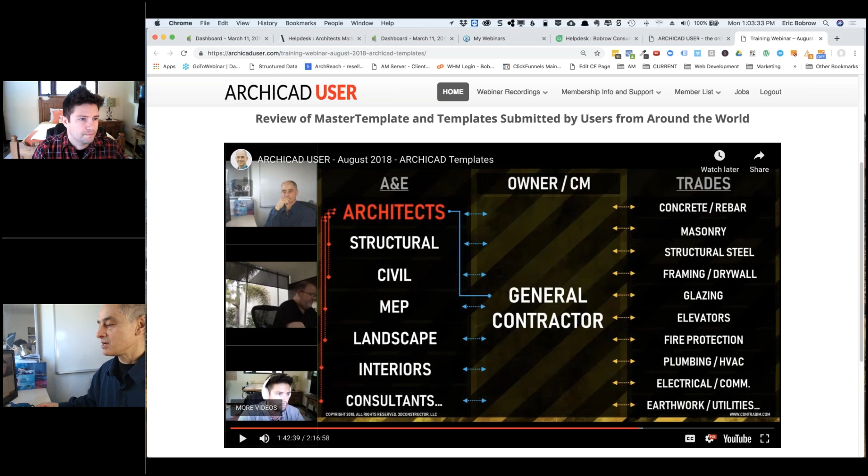Now, John was on the monthly webinar in August when I had a session that was focused on templates and sharing templates from different people. And John emailed me just shortly before that session saying, hey, you know, I have a template that people might be interested in. It's rather different. It's focused on construction management because that's what John specializes in. And so here you can see him in the bottom left corner of this screen. And actually, Roderick was on that as well. We looked at about 3 or 4 different people's templates as well as the master template. So anyway, I'm glad to have you back on, John. I'm going to switch over to have you show your screen and you can introduce your work.

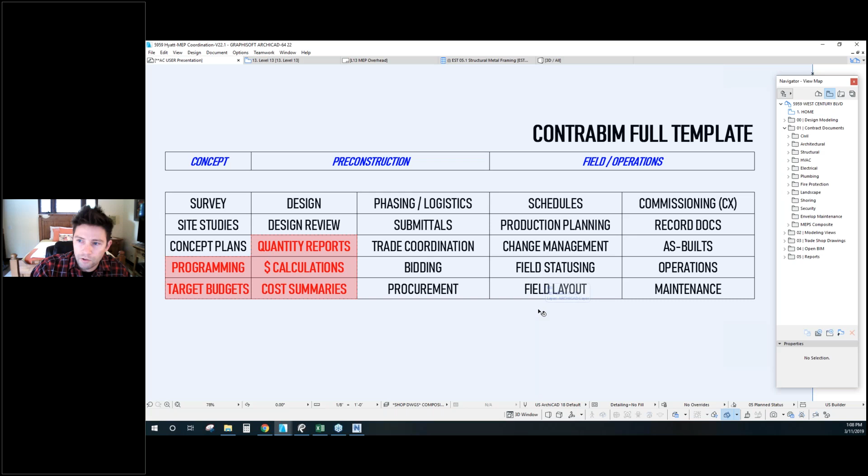But before we get into the cost estimating component, I thought it'd be good just to give a quick background on the overall template and show you the file that we're in right now, a file that I'm using primarily for construction coordination, to point out some of those other features and how I like to utilize ArchiCAD.

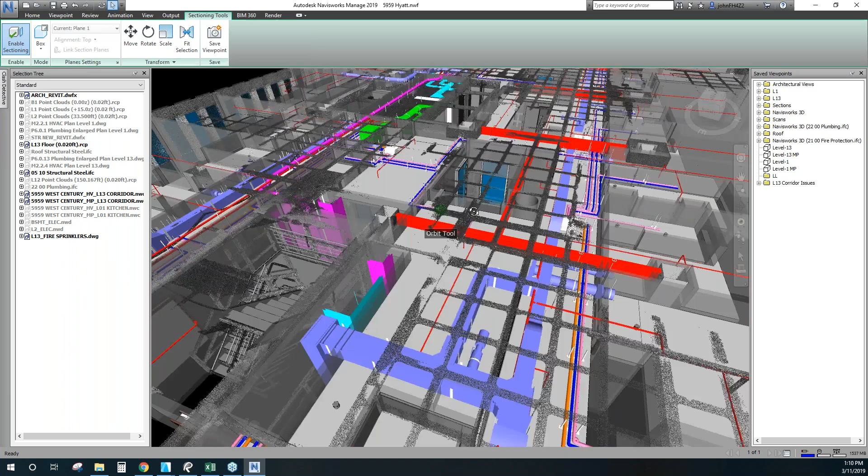And so really I like using ArchiCAD as a way of being able to organize all of my different, in this case, contract documents, as well as shop drawings that we're getting from the subs. So that's what I wanted to point out real quickly in this demonstration, just how we can organize this to bring all these different formats together in a way that you can really review it, produce different composite drawings, and really help aid the construction coordination process.

So a few things I just want to point out here in the view map: this is the full template that I provide, but this design modeling is set up for if you were to actually be developing design in this type of workflow. In this case, we're not using that, so we won't really even talk about that.

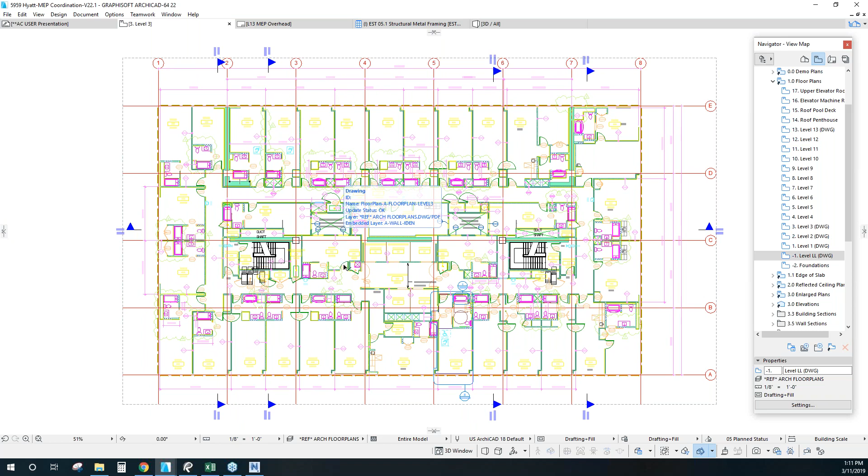But where things start coming together is underneath the contract documents tab here, which is where for each different design discipline, I'm able to essentially create different views where all these drawings, whether it's in a PDF format or a DWG format, can be linked into ArchiCAD. Now, this is, I'm sure, a workflow that a lot of people use as standard practice for linking in different consultants' drawings. But for construction management, this becomes really powerful when you can start taking your backgrounds, in this case, looking at an architectural background.

Say we'll go to that level, the 13th floor. And then we can start overlaying these different drawings against all of our other MEP design documents. So for each different discipline, I can just open up a few of these views real quickly. We can see ductwork here as well as mechanical pipe. For plumbing, you can go to that view and see the plumbing lines up there on the 13th floor.

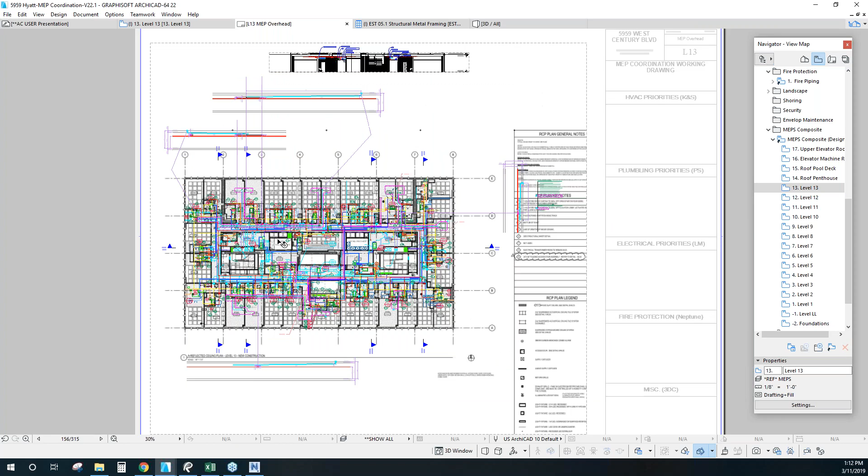Fire protection, there wasn't really a design document for fire protection, but we can start producing these composite drawings that are really useful for coordinating complete scopes of work in a given location. So what we're looking at here is an RCP with all the MEPs overlaid on top of it for what we have currently. And this makes it really easy to produce these different composite drawings that you can then publish out with layers, so you can turn on and off the different layers for different systems and use this as a nice clean document for communicating with the team.

So being able to organize contract documents is one big part of it. The other side of it is the shop drawings. So for example, being able to look at structural steel shop drawings. In this case, these are those new drag beams that we were adding to the space. Being able to bring together progress HVAC models. This is actually a single object that's brought into here, but this is a 3D DWG that I opened as an object to bring together.

And then of course, for the trades that I'm helping model, such as fire protection, we can open up the fire protection here and see that particular scope. And just like we can do with the design documents, you can also overlay everything on top of each other and use this as a way of really bringing all the trades together, your different design backgrounds, and really get additional views out of the model.

So one thing that's pretty cool here, I was worried I was going to do this and not be able to do a marquee. Let me see here. Oh, shoot. Eric, how do I get my marquee up here when I hid all of my design tools? I knew I was going to run into this. Let's just go, sorry, toolbox.

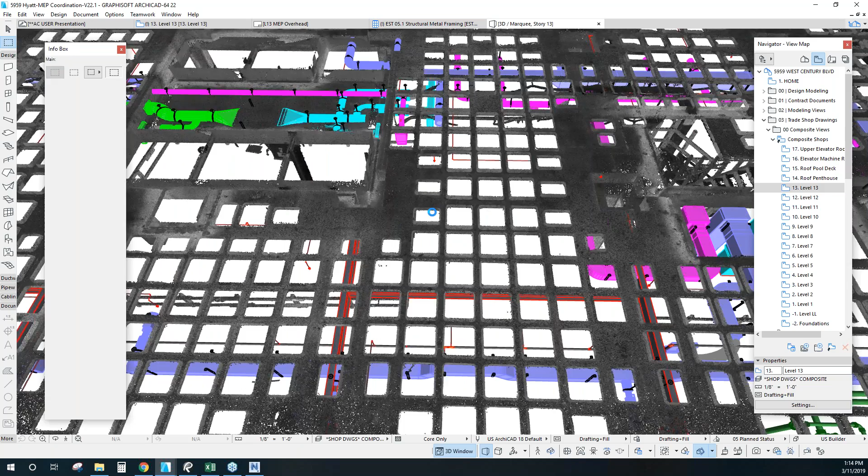Here we go. I just want to grab a chunk of this model. Maybe we'll grab right through here. Show this in 3D just so you can get an idea of what we're looking at. And so again, here's a combination of drag beams that I added. Fire protection is all the red here, as well as that 3D DWG that we had brought in as a coordination model. So one thing I can do here is turn on a point cloud that you saw a little preview of there.

And again, this is another way of being able to bring everything together into a nice working view to really see what's going on, and see that, okay, I've got issues here when modeling this in as the as-built or the shop drawing showed for fire protection. We're going to be hitting some drop heads or capitals here. So anyway, I just wanted to give a quick preview of how the overall bigger template can operate.

So hopefully that gives you a quick introduction into how the big picture is set up, really looking at design review, submittals, trade coordination, design, of course. And this is the area that I was just talking about. And this can flow all the way through into the field, and then ultimately, at the end of the day, having as-built and record documents as a way to capture all the design progression over time.

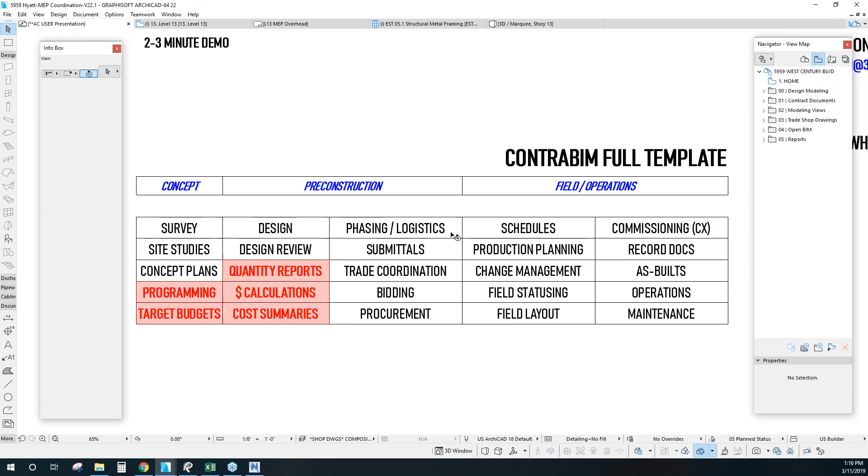Hey, John? Yeah. So there are a couple of questions that I think would be good to at least briefly address before you move on. Sure. From Tom Markunis, why use ArchiCAD for this workflow? Aren't there dedicated applications out there for this? And a somewhat related question from Luis Barrios: how much has to be modeled from the consultants providing only 2D work?

So I guess if the consultants are only giving you 2D, you have to model certain things to get obviously the 3D views and for quantities and things like that. So just a little bit of clarification on the workflow with consultants and the idea of using ArchiCAD as the central tool in this case.

Sure. Again, the purpose here for me on this particular project is just trying to coordinate these spaces as quickly as possible. Because the only thing that was modeled in 3D from the design team was essentially the architecture, which is what we saw here real quick with this Navis model. All the MEP consultants were doing everything in 2D, but the subcontractors in some cases are also doing some of that modeling, like HVAC, for example. How I showed that HVAC model that we got.

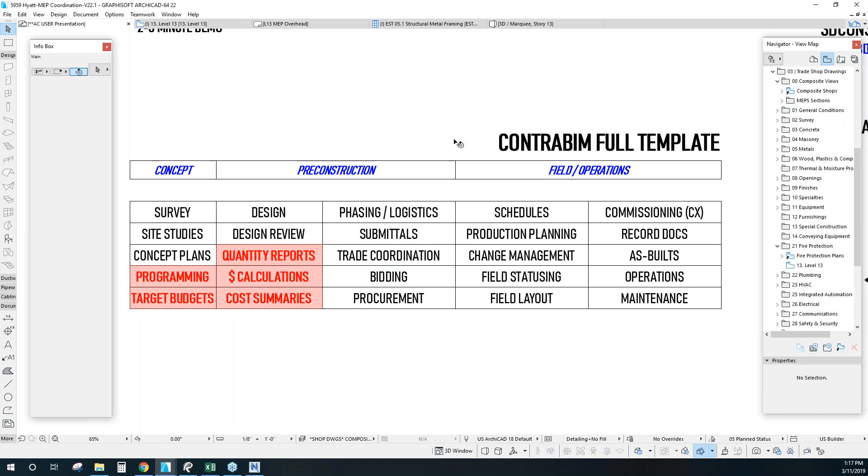Obviously I'm not going to be modeling something that a subcontractor is going to be modeling, but I am going to be doing select modeling, like I showed with the structural steel, the new drag beams that we added, as well as fire protection, things that we needed to coordinate the space in some really tight areas that weren't going to be provided by any other team member.

And since I'm taking lead on coordination on this job, it's kind of my responsibility to fill some of those gaps to make sure that in some of these tight areas, we can really make things fit and get underneath the tight spots. Like, for example, getting underneath these drag beams. I can see, obviously, in this case, the modeling done by the subcontractor is not going to work. And so if I hadn't modeled this in, then maybe we wouldn't have picked up on that.

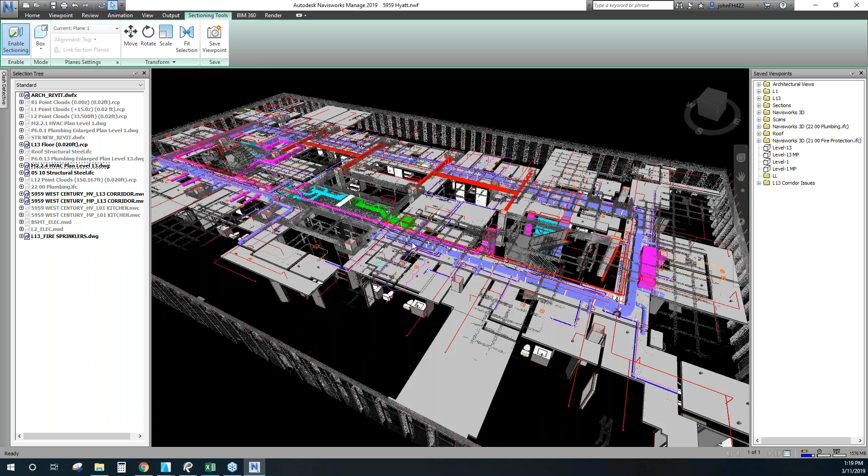So I think the first question was why use ArchiCAD versus other dedicated programs for this? Well, I'm using ArchiCAD certainly as a tool to provide additional support to the effort going on in Navisworks, which is where we're bringing all available 3D content together. But Navisworks is somewhat limited in terms of how you can view 2D content. Yes, you can turn on and view in 3D. Let me turn on HVAC here just for example. We can view this in Navisworks, but it's really not very useful to look at it in this type of format. It's better to have the 3D models there.

So again, I'm using ArchiCAD as a way to bring all that different content together in all different formats. In this case, contract documents as backgrounds, shop drawing models, additional models that I'm generating, and bring it all together, and really there isn't another program that can do all of that stuff in one package like ArchiCAD can. Not as well, at least in my opinion. So did I answer those questions, Eric? I think well enough for now. Obviously, one can go deeper and deeper.

So move on to, I guess, the core of what we wanted to look at today, which is doing the 5D cost and quantities. Sure. So when I look at estimating in ArchiCAD, there's a few crucial parts that I've developed that really make up the core functionality of the cost estimating workflow. For me, the big part of it is cost properties. Using ArchiCAD properties is really the main tool for managing cost data, as well as a bunch of other variables that go into the estimating workflow.

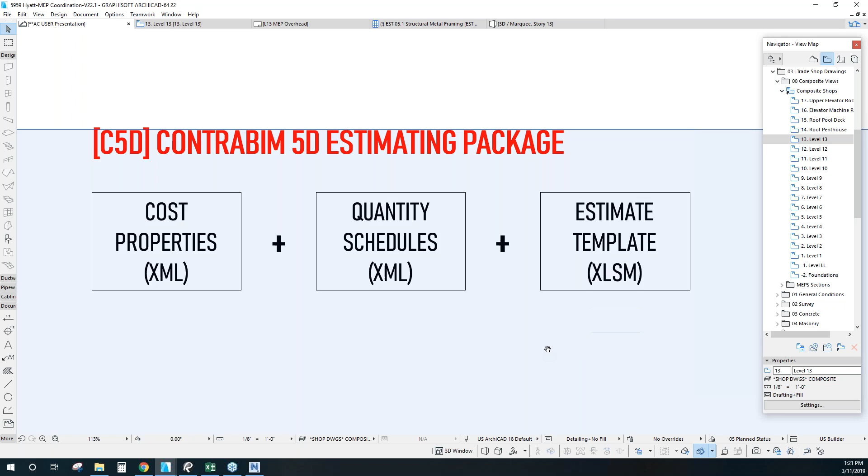So to dive into this a little bit deeper, how this can be applied, for me it all starts with properties. Having properties available such as your unit cost, specifying units, maybe different pricing packages, different factors, and really having all those underlying data and parameters available to drive the estimating workflow. So for me, properties are really essential to my workflow. There's other ways of generating some of this info, such as through IFC or through some of the native parameters available in the design tools themselves. But I found that properties really enable you to move data around quicker. You can import and export it to Excel and do that round trip update.

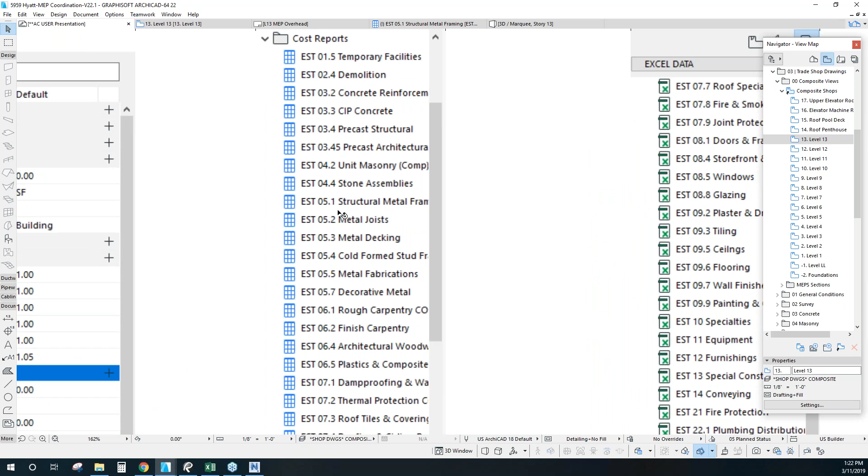And it has just become, for me, a really useful method for storing and managing all that cost data. So really the next step after you have that data available is creating cost reports. So you can see here, if I zoom in a little bit, we can see our concretes, our masonries, our steels, our wood, thermal protection. I essentially like to mirror all the different bid packages and the CSI categories into the reports within ArchiCAD. So that's what we'll show here in a little bit.

And as you do this, that's where you assign your different codes, your cost data, and you use these reports for what I call conditioning the data. So, going through and fine tuning what information's in there and your unit pricing and how you're pricing it. So once you've dialed in your reports, then you can set up your publisher and ultimately just refresh your publisher with a link into Excel. So that's the workflow and the big picture: properties, reports, and publishing with Excel.

So now we'll transfer over and we'll do maybe a, Eric, are we still good for maybe a 15-20 minute demonstration of this workflow? Absolutely. Okay, on time for now.

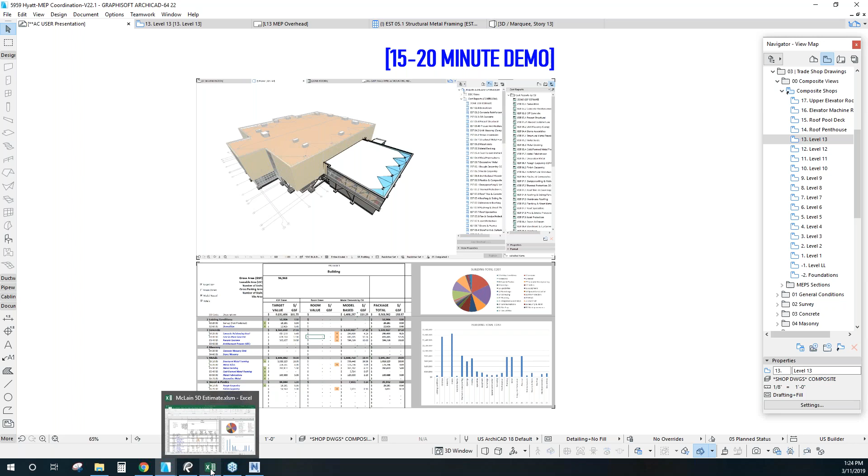Okay, so we'll be taking a look at this project. We'll go through all these different cost reports, not all of them, but maybe just a few select ones. And then we'll look at how it is being tied into ArchiCAD. So you might have seen some of the videos that I've done in the past, and I'm thinking for this presentation, instead of starting in ArchiCAD and then going to Excel, it might be interesting and maybe even easier to understand if we start with the end in mind and then work backwards into the model so we can see where that cost data is coming from. So I think that might be a better way of doing this.

So I'm going to pull up, we're going to start with the Excel estimate template that we're looking at here. So what we're looking at in this view is the CSI summary Excel estimate template. And what I want to point out here that's pretty important is on the left side, these two columns right here, these are my standard line items that I like to use on every single project, regardless of the project type and the contents of those projects. So having a really standardized summary sheet just makes everything easier to work backwards, so that you can fill the different scopes in a manner that's always going to be reported into this summary view.

So as I scroll all the way down here, we can see we go down to division 33. CSI does have more divisions than this, but this is really the bottom line of what I call hard costs, or costs related to the final product themselves. And then below the hard costs is where we can start adding in our general requirements, general conditions, as well as all the below the line markups that we might want to add in, so that we ultimately end up with a grand total. And we actually have a few different options here for producing different grand totals.

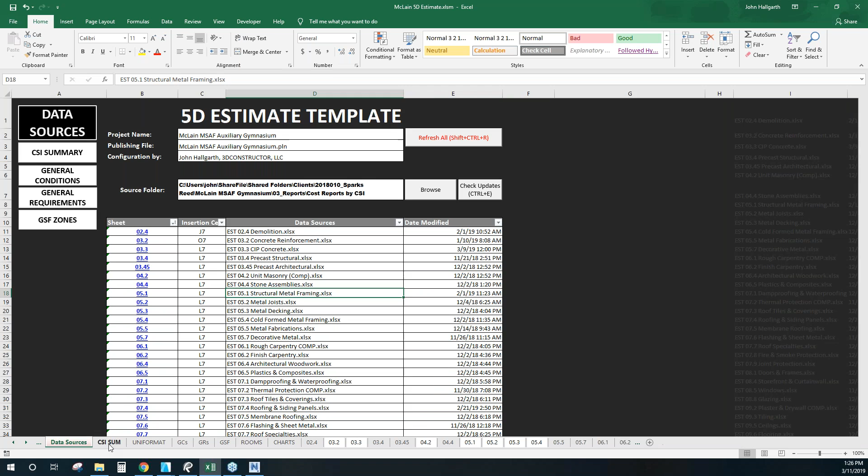Going back to the cost reports, anything over here on this side is all hyperlinked. So if I click on one of these, it's going to take me to a cost report specific for, in this case, cast in place concrete. I can refresh this data. And what it's highlighting here is the data source coming in from ArchiCAD. So if I delete this, you'll see that everything on the left side here is all formulas being pulled directly from the data source on the right. So as I refresh, everything updates and populates.

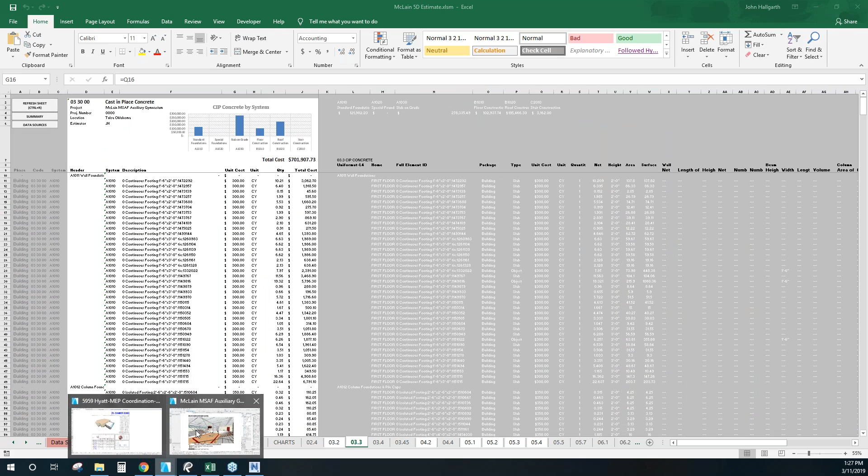And so when I publish out from ArchiCAD, all I have to do is just refresh this sheet and then all the numbers are going to be updated. So again, kind of working backwards into this, I think now, with that kind of setup, maybe it's time we can jump over to our project and then we'll kind of work things the other direction from here.

Just a quick note, my client in this case was Sparks Reed Architecture. They're based in Oklahoma. They approached me with a project that they had previously modeled and completed. One of their designers actually attended one of my workshops, and after the workshop asked me to essentially take their existing project file and build out the cost estimating workflow into it, so that they could reuse this exact file on their next project of pretty much the exact same project type.

So building another basketball arena essentially for, I think, the same school district is what they were wanting to use this model for. Their purpose for having this cost estimating workflow built in was so they could run reports and quickly get all the quantities, and based off the pricing of this project that they were already in the middle of building, where they had some decent unit price numbers, be able to apply similar pricing to the next project.

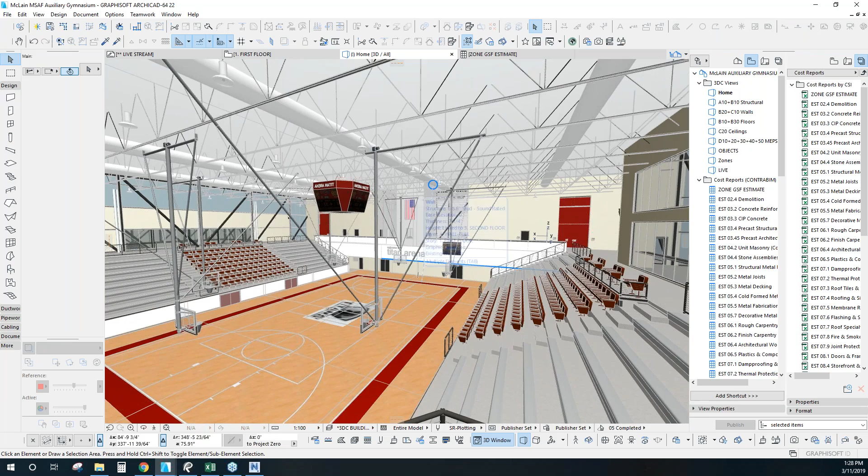So to walk through the steps of how I approach this, it all started with looking at the properties. Anything here with a CB behind it stands for the 5D portion of my template, or the Contrabim 5D parameters. One of the important parts when I look at assigning information to a model is how you break that up into different CSI codes. Just by using an option set here, we can assign these codes, and as soon as I assign them to individual model elements, we're already starting to get in line with the summary estimate sheet we pointed out a few minutes ago.

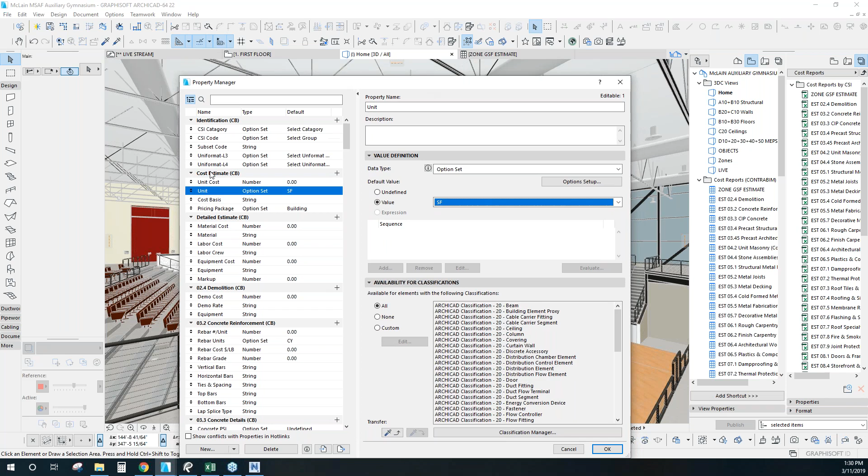So depending on what I assign it to here, that's going to give us a really good chance of getting those elements to land on the appropriate cost reports, so that they end up in the right buckets when we look at things in the summary format. I like using a combination of CSI codes as well as Uniformat codes, which can be really useful for organizing building systems. But this is also where we store our cost estimate data, so unit costs, defining what units of measurement we're assigning to different model elements, and so on. So there's a lot of different cost properties here.

I'm just going to roll up a few of these, but really that's the first step: going through and adding in these properties and making sure they're assigned to the appropriate classifications. Once we've done that, we can start looking at the individual cost reports. So the process is you import the properties, and then you can import all these different cost reports. Let's pull up that cast-in-place concrete, and we can quickly show how we can refresh from our model right back into Excel.

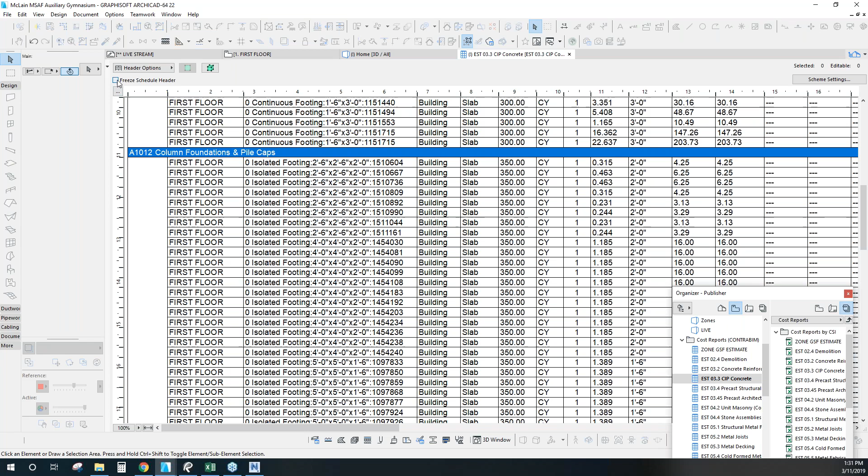To get a little more space, I'm going to roll that one over and pull this down so we can see it off to the side. In this report, we have a header based off Uniformat level 4, so we can see wall foundations, column foundations as we scroll down. Let me freeze that top header. As we keep going down, we have a few other items. Some of these probably need to be renamed with a more accurate element ID. But if we grab just these wall foundations, by highlighting the header and clicking on it to select in 3D, it'll select all of those foundations for us.

We can isolate those. And if we want to do an update on the cost, I would do a Control-Shift-T, which goes into the edit of the selection set, allowing me to modify both objects and slabs. That's why I'm doing it this way versus going through the info box. Say instead of 300, we want to go to $275 a cubic yard for these wall foundations. So we do the update there. Then to go round trip, it's just going back to the publisher we've set up, which is essentially these same cost reports located in the publisher under a cost reports folder. Go here, publish.

Now that we've updated that to 275, as soon as we come back here to our cost report, all we have to do is just refresh, and we can see all those wall foundations updated our cost. So that's what I really like about this workflow, is it's really quick to work in the model and go back and forth to refresh things.

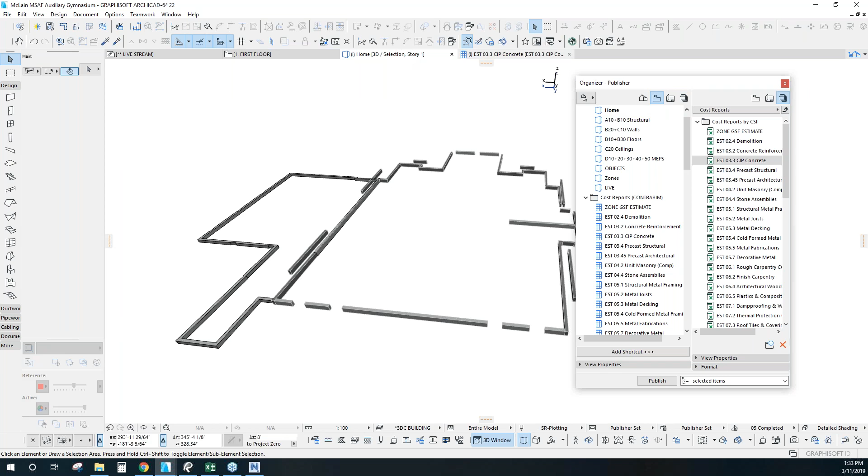And it gives you a lot of flexibility, breaking down your cost reports into these individual trade packages is how I like looking at them. Because depending on what trade you're looking at, you're going to have very different data associated with those reports.

So let's take, for example, the structural metal framing, which is, again, a totally different type of report. We have different values here, such as the object type in this case. So we're actually pulling into the ArchiCAD attributes to pull some of this out. We're basing this, instead of off cubic yards, off tons.

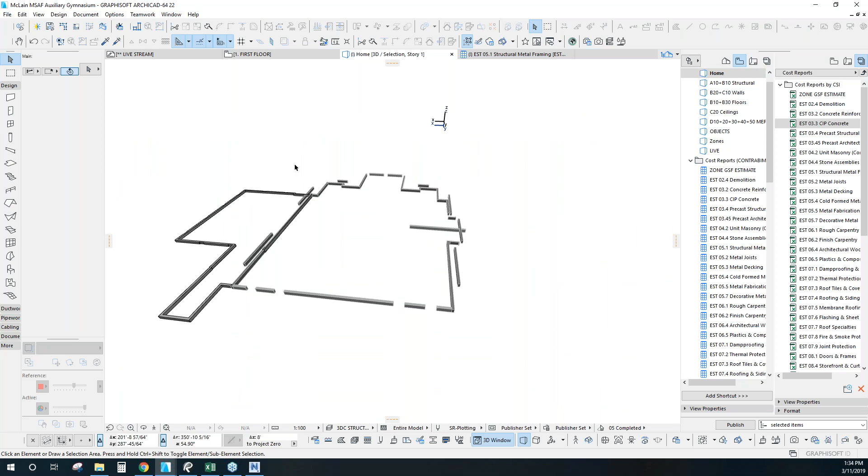In this case, we're actually not pulling up the W shape for structural, because what's interesting about this is it's actually content. Oop, I need to unfilter that. This is actually content coming through from an IFC import of a Revit model. So what's cool about this is we can still do these estimates based off anything that's native in ArchiCAD. It's always easier in ArchiCAD, but we can also do this based off external design content as well.

And so again, in this case, structural columns we have there, structural braces. I could grab all my braces, go in, and maybe I want to update the cost here. Maybe these should be a little higher, maybe 3,500 instead of 3,250. Update those, go back here. It's a lot of elements, so the more elements you have, the longer it'll take, but we can quickly publish that one because it's already loaded.

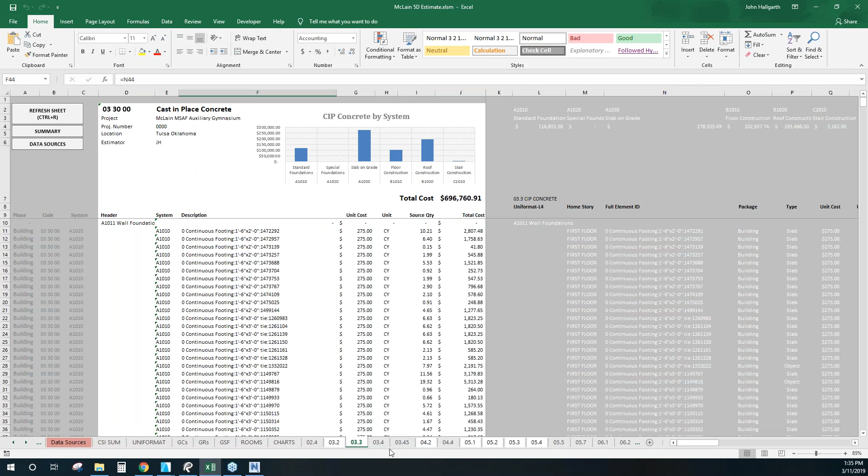Go back to our estimate, go down, let's find our structural braces. So hit refresh, and there we go. We're now at 3,500. So that's kind of the workflow in a nutshell. Each of these has different criteria. Some can be based just off the CSI codes that we assign, which I've found to be the very cleanest, simplest way.

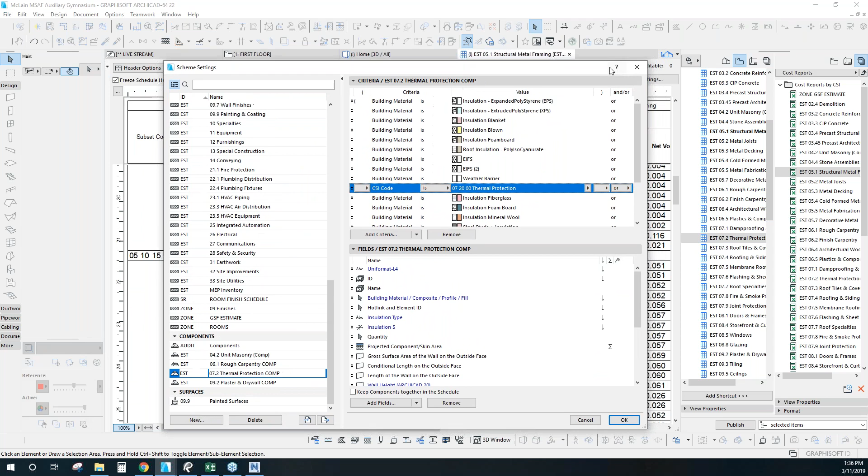But some other reports might have different criteria that we want to set up, such as using building materials, where perhaps we want to pull out of a composite profile or a complex profile. In this case, say insulation pulled out of a wall profile. So that would be another way of going in, as well as combining that with, say, a CSI code to extract data into these very specific cost reports. So yeah, that's kind of the workflow.

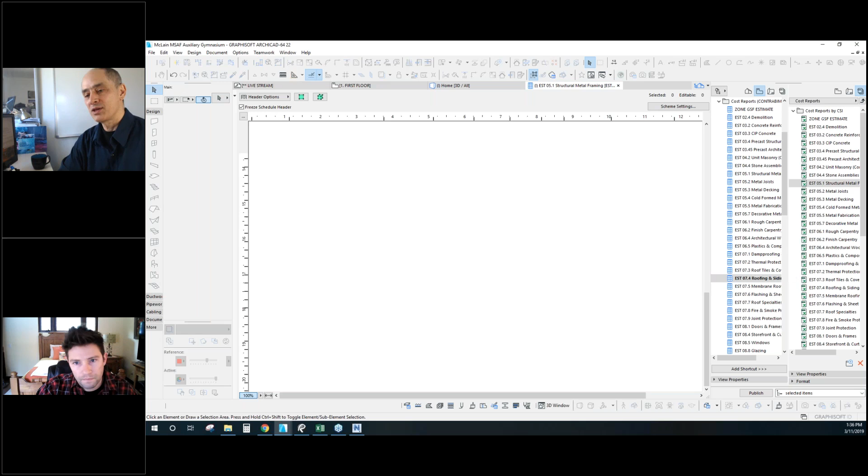So I see some questions from Tom Markunis, who I know has been doing some work with, I forget, he might mention, a very prominent architecture firm. He's been in Cairo, I think, working on some projects there, but a famous American designer.

But he's asking about the size of the model and whether you need lots of processing power to do this. And of course, you showed one 15-story building or whatever it was, and you showed this gymnasium. So talk about the size, relative processing power you need to do data like this, and how it relates to 3D, because my impression is that the data side is actually a little easier for ArchiCAD than cutting detailed sections of a very complex model.

And then the other thing is, Tracy Stone asks, do you have to manually assign the properties to each element, and how long does that take? So those are a couple of questions you can weave together. Yeah, so in terms of the size of the model, I was looking through some files here to see if I could find the original model size.

Currently, this file that we're looking at for this gymnasium is just under 300 megabytes, so I wouldn't say that it's a massive model. I know some files can get much larger than that, but I don't think it was much smaller than that. It may be like 10, 15 megabytes, but I don't think it was drastically smaller than that. So the data didn't add a whole lot of size, the costing data.

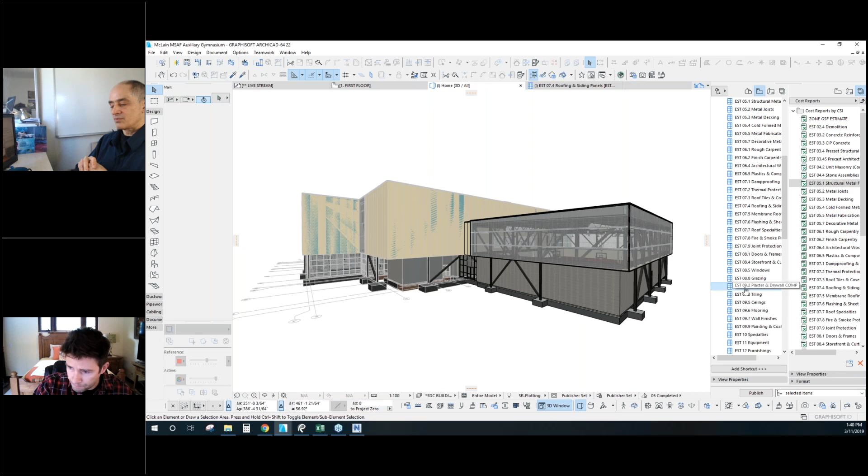Yeah, so you do have to manually assign stuff. Some of the reports that you wouldn't have to would be the ones that are actually pulling out the materials. So all you would have to do is just align the building material to whatever the local attributes are, and then this would automatically start running reports just by going in and searching for it. So basically it will just report how much gypsum board or insulation or whatever. Yeah. That type of report is not referencing the codes.

Most of these reports are going to be referencing the codes that I've assigned. So in that case, it is a manual process of going through and assigning the correct codes and the cost data to those. You have to assign cost data regardless. That's a manual process applying that to these different categories. But for me, it's a process of reviewing the content of the model, kind of performing QA/QC to make sure that it's modeled accurately, so I'm going to get the anticipated quantities, as part of doing quality control on the model.

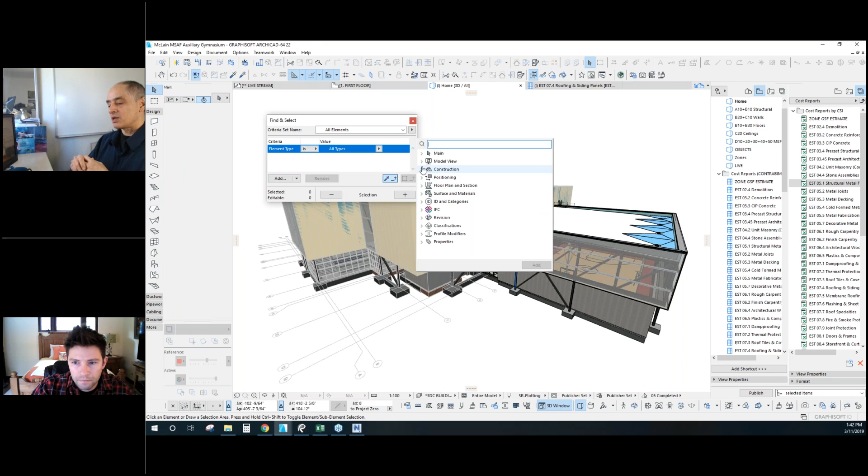Okay. So you've developed some very efficient ways to do find and select and be able to make sure that everything is assigned to something and that you can see all the elements that are actually grouped together. I know you can isolate all the elements that are under a particular category and say, show it to me in 3D, and then you can see, oh yeah, that looks good, or wait a second, there's something in here that shouldn't be. So I know that you've developed efficient ways to do it.

Question, Lewis asked, what level of detail or LOD is the gym project? I'd probably say this is 300, 350 maybe. Okay, and for those of you who don't understand that reference term as an actual formal term, as you go up through the levels of detail, you get more and more information visually as well as data. 100 is very conceptual. 200, you're getting some more geometry in there. 300, you're starting to get working drawings, I believe, and 350. And then 400 is where you actually could do a full-size cutout of things if you wanted.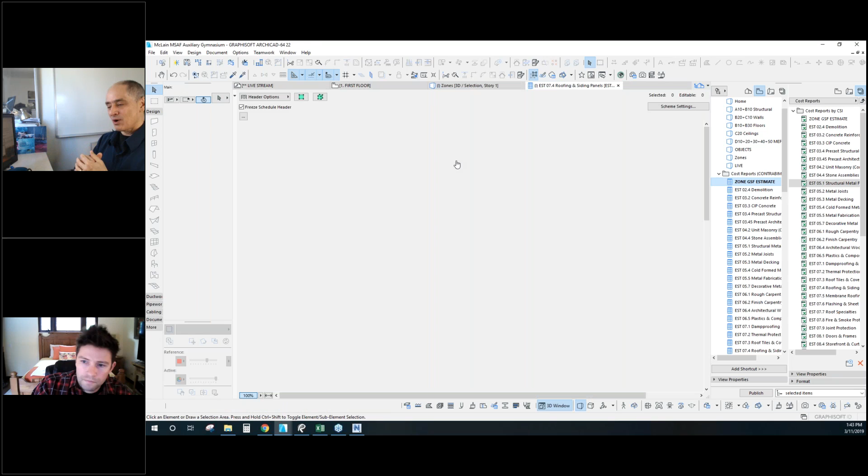Yep. Eric, one part that I wanted to point out that I didn't cover yet is the difference between conceptual estimating and detailed estimating.

Yes. Can I take maybe 2 minutes to explain that real quick? Yeah. Okay.

So what I want to point out here is I'm using 2 zones in this case to represent the gross square footage of this project. So using those 2 zones, I can run a report that actually, again, this is talking about standardization. Every single line item here aligns exactly with the summary report in the cost estimate. So what I can do here is I can actually assign a gross square footage value to those 2 zones.

Say, like in this case, $12 a square foot. Maybe we can get a little tighter. Maybe we go $11 a square foot. And I'll just publish this out real quick while it's running in the back. And so the way that this translates over, we can actually see here, this is a target gross square footage. This is an expression that's adding all these up. And this is actually a cost that's $5,560,498, just taking that value multiplied by the area of that zone.

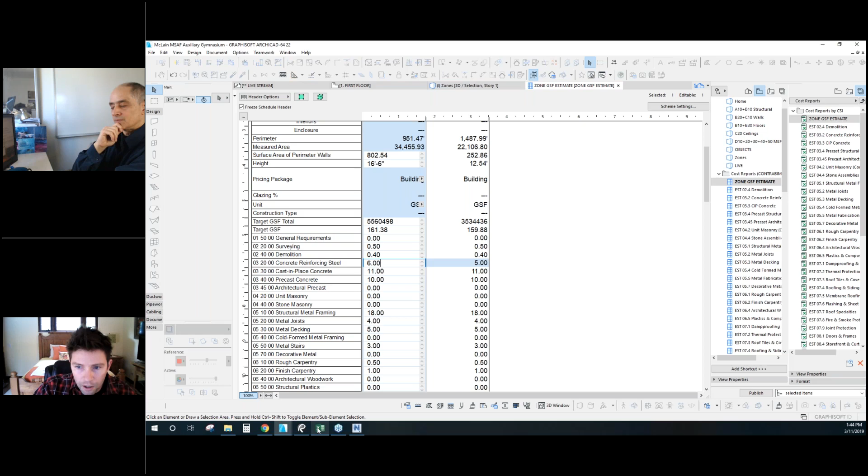But these can be really, really useful for doing conceptual estimating. And so that gets back to these 2 columns that I pointed out earlier. So one of them I call a target value estimate. And I'm actually going to clear these out here. And you'll see that as I put a little check mark here on the side, you can see what number I'm using in my total package here.

So these target values are really useful for doing an early, say 5-minute estimate where you're loading up all the cost with every single line item as applied to your project. And you're able to use these zones as a way of just giving yourself a target budget for each of these line items as you work through the design.

So it's also a way of filling scope gaps in the model where obviously you're not always going to have everything modeled to a fully detailed level in order to produce an estimate. You can tell as I get down here to the MEPs, in this case, I am using all of the conceptual model numbers here versus the model base coming from the different reports.

So what's nice about this, we'll go back up, say, to the concrete example again, is after I've completed an estimate or completed the model, say for cast-in-place concrete, I can actually choose which one I want to use and carry in my total cost. So this allows you to balance between a conceptual estimate as you progress your design into a very detailed estimate, and be able to produce a complete picture to really make sure that you're picking up everything, even if you haven't modeled it yet. So hopefully that helps fill that gap.

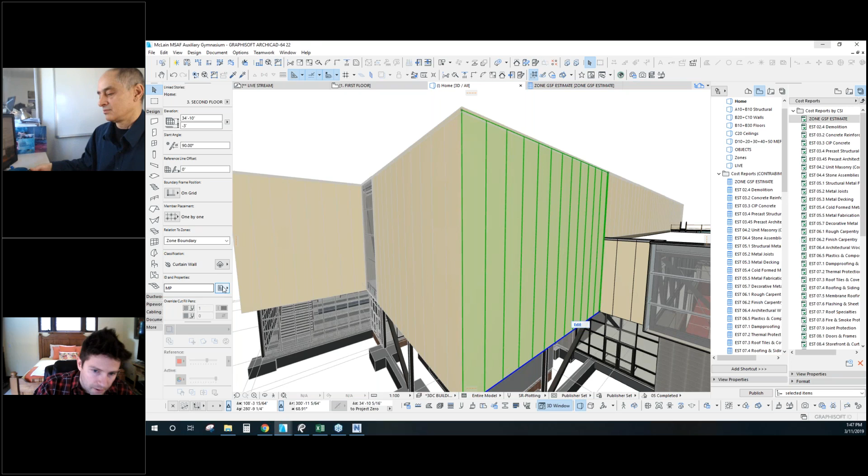So to assign the cost data, say if there's no data assigned to these at all, obviously right now there already is, but you just go through, and I like using my info bar on the left here because it makes it really easy to scroll up and down. But you just go through and you assign what category it falls under, what location, and the unit cost, you just plug it in right there.

The unit cost and specifically the unit. You always have to define a unit before you even define a unit cost. You can't have one without the other. In terms of composites... Now, before you go on, you just showed how to do it with one, but you would obviously want to find and select all that are similar. Yeah, exactly. Then you do it once and it affects those 10, 20, or 500 elements that are similar.

So it's not like you have to go through every item. You just have to go through every type of item. Yep, exactly. To do a composite. So for example, this wall here has several things associated with it. There's drywall, there's framing, there's backer board, there's tile on the outside. So this is a different scenario where, because this is modeled as a composite and there's several trades packed into one, this is where we go a little bit deeper.

You can actually see my unit cost here is 0 because I'm not using this unit cost. What I'm using is, if we roll down here a little further, under thermal and moisture, I have an insulation type and I have an insulation number based off the square footage there. If I go down, I also have a framing type where I have a metal stud 6-inch and a framing cost per square foot. I go down a little further, the outside finish in this case is tile. I have $7. The outside sheathing type is cement and backer board.

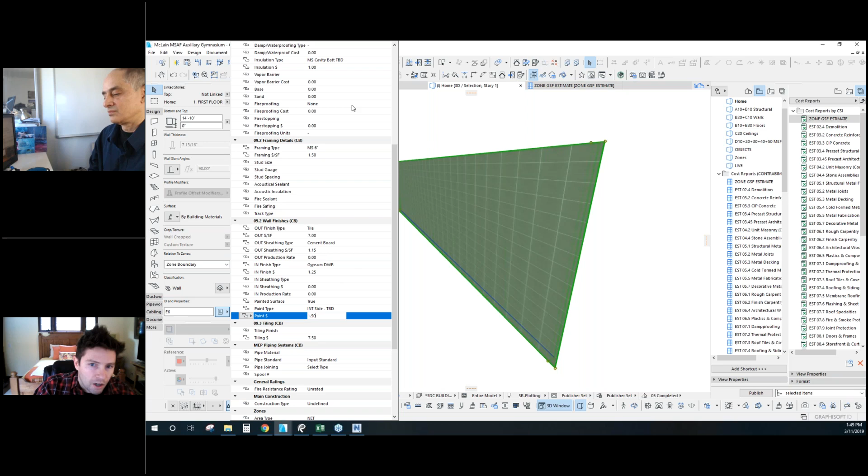And so I have these, what I call secondary costs that are broken out. I also have things such as paint here, like, is it a painted surface? True. And so it's interior sided paint, $1.50 a square foot. So you can see there's these different cost properties here available to produce those different reports.

One thing I'll point out, since there was a question on rebar, is I'd run the report exactly the same as the concrete reports. The only difference is the values that I assign. So in this case, I'm assigning pounds of rebar per unit. All these continuous footings have 150 pounds of rebar per cubic yard. I have a cost per pound. And so really using these is how I'm assigning the different cost data.

So there's probably some down here like slab on grade, I'm using 1.5 pounds, 2 pounds per square foot. So that's a different type of rebar calculation. But what's nice is it's flexible where you can modify it, and whatever makes the most sense for that object type, you can do that. Did I answer a few of those? I think that's as much as we should go into the details there.

I think let's just talk a little bit about our current upcoming plans, and then we'll be able to introduce Roderick. So you want to talk about this, or shall I? Sure. So, Eric, we've been talking for a while now, and something that we've discussed in the past has been the idea of taking this cost workflow that I've spent a ton of time developing and building out, and taking your template, which obviously is one of the more widely used templates in the ArchiCAD world, and combining these two in a way that can really help the MT users get this added benefit of being able to use all these preloaded reports, preloaded objects that you have in your Legends file, and being able to deploy this type of conceptual to detailed estimating workflow delivered through your master template.

Now, maybe we should just tell people that we noticed we have a little bit of a glitch. Sometimes if I change to the 3D view, the iPad seems to disconnect, so if that happens, I'll just reconnect immediately. All right, so I'll just put this up on full screen so you're not bothered with the background of the other window. So you're now only looking at my iPad, correct? That is correct, yeah. Okay, perfect.

So what I'll do here is give a compressed version of the presentation that I did recently at the BIM World in Munich, Germany. I think it was end of November last year, and it was quite interesting. I assumed I was going into an audience which was very elevated, very knowledgeable in BIM, and was surprised to see that it's the same as many other conferences that I give in other cities, let's say within Latin America, and that everybody's still early in the process. So I was quite surprised at that. But anyway, let me just go here.

Okay, so one thing I'll point out, and I know that Eric wants me to explain how this is prepared, and I will do it shortly after the presentation, is if you notice, I'm just using BIMx. And this is what's called the presenter view of BIMx. When I was putting together the presentation for the BIM World Munich conference, I was told I was only going to have 20 minutes of time on the podium. I mean, very German, very, very exact. And they wanted me to do something a little bit different.

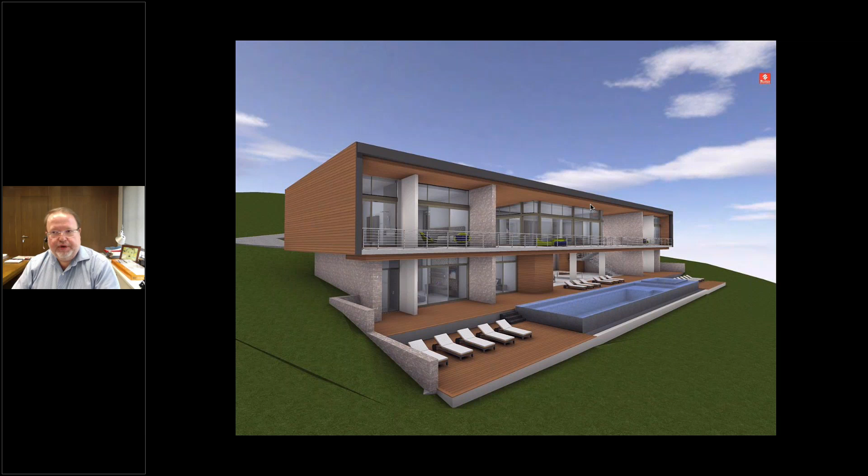And what we did is that we created different designs that would tailor to the different topography conditions of each of the sites. So we broke down the whole, let's say the whole mountainside, into probably, I would say, about 6 different types or different condition types. And then we designed a project for each one of those condition types.

So instead of a project or a resort where the client can come in and just buy a property and then say, oh, I want model A or model B on that property, this was the other way around. So if they wanted this particular site, then there was already a design assigned to that site, or maybe 2 that could fit that sort of condition.

So forgive me, I'm going to swipe up the notifications if they pop up, because I need to keep my Wi-Fi turned on so that I can project from my iPad over to my MacBook.

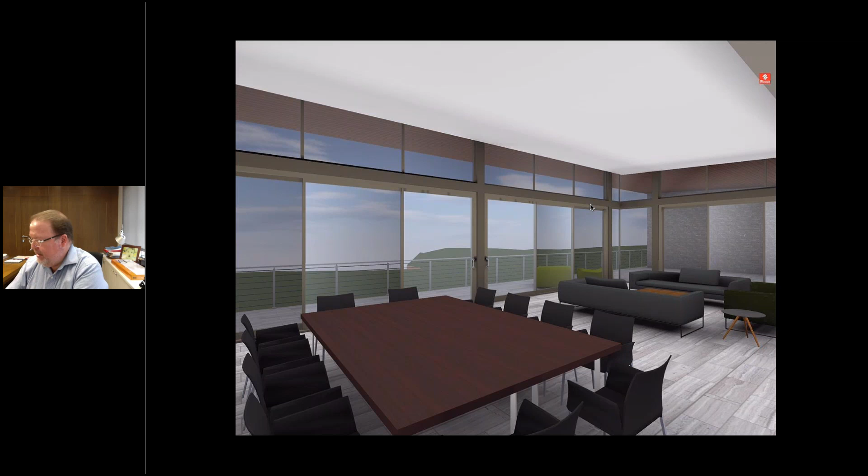Okay, so this is an example of one of the homes. You can see the level of detail that we put in our models. So we try to be very broad and precise, and we try to have an approach where everything comes from the model as much as possible. Now, of course, in this case, you see, that's same area. We do, of course, use external rendering programs.

And in some of those cases, let's say all of this entourage, which looks nicer for the purpose of the renderings, is added only on the rendering program. We don't like to add it straight through into ArchiCAD because it just raises up the polygon count too much. But if you see, the dimensions and the layout are precise. So a couple more views of the inside of this living space of that home.

And then one good example area on our projects is our bathrooms. So we put a lot of detail on our bathroom designs, and we take lots of care modeling specifically many of the items in the spaces so that they're actually true to life. So if we can't get the actual manufacturer model, we will create it.

So in this case, let's say the bathtub, the lavatory sink, the faucets, all of those we were either able to get from the manufacturer, or if we didn't, let's say it was available, but maybe in a different format, then we created the object ourselves to make sure that what we're putting into our designs and our plans is true to life and not maybe just an above counter basin sink that may be sort of a representation, but that then may lead to some misinterpretation once the project is under construction and so forth.

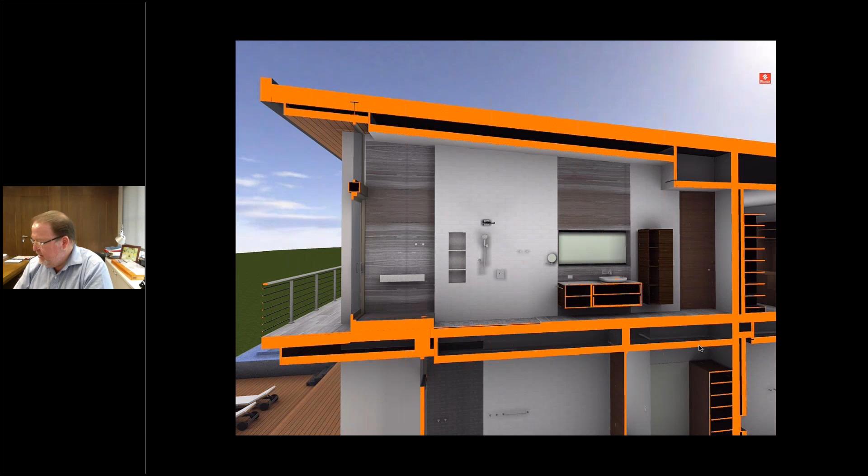So just a cutout view of that same space, which also helps to see a little bit of everything that I was talking about. And here's a view of one of our interior drawing sheets, where you basically see the same thing. And as ArchiCAD users, many of you know this is just live from the model. This is not a drawing. The main philosophy that we use here at the office is nobody's allowed to draw anything. So anything that is represented on a set of plans has to be live from the model.

And that applies to things such as this light switch. So yes, there will be a 4-gang light switch here, and we've accounted for it. We have enough space in the wall for a 4-gang plate. And the plug, this is the exact placement where we want the plug. And that plug is visible both here in the interior elevation as well as in the model itself. And the details for the niche, where the hangers go right next to the shower, and so forth. So all of that is actually live and coming from the model.

As we go here, you see a good representation of what I was just talking about. For those of you currently using BIMx, you know that this is second nature. For those of you that still aren't using it, my only question would be, why aren't you using it? But here you can see a very quick overlay of the model with the drawing right on top of it, which speaks to exactly what I was referring to, that everything is true to the model itself.

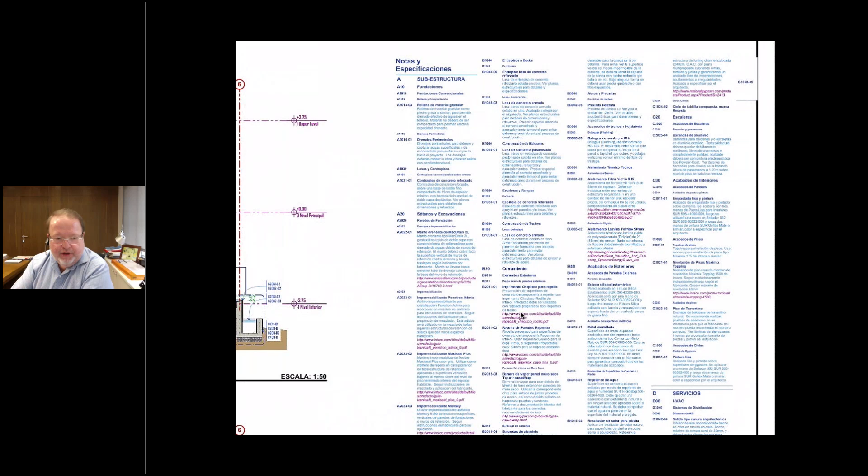So we even put that sort of information. This is not tappable on the BIMX, but when we publish a set out to a PDF, if somebody just opens this up on a PDF viewer program, then they will be able to just click on that link.

Another good example of level of detail and information that we bring on our project is our door schedules. We prefer the door schedules to be a little more visual and to have all the necessary information. But you also notice one thing that typically comes across in the way that we approach our program, our designs and the way that we use ArchiCAD, which is an important use of color.

And I've been an avid advocate of this for some years. I remember this was probably one of the topics of one presentation I did some years back on the Masters of ArchiCAD program from Eric, which was my application of color for using BIMX. And it's shown us that it enhances the readability of many things, and it enhances the clarity for the person reading the set of plans.

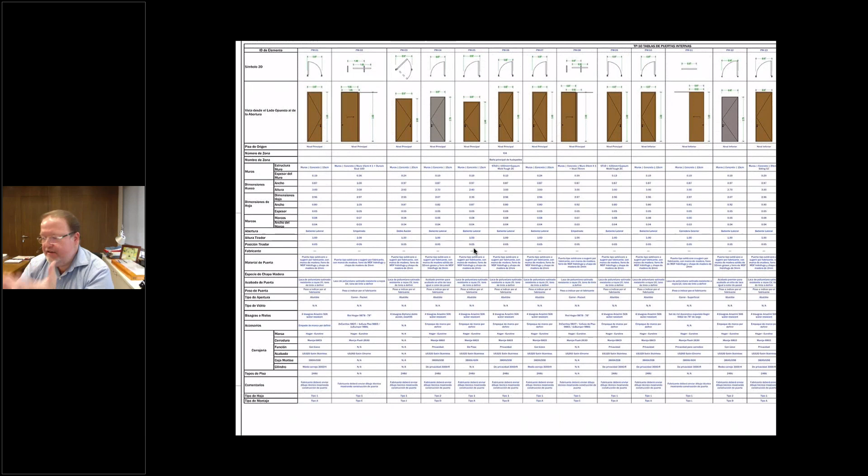It just makes it easier for them. They sort of get used to it. And for us, it's just second nature. Anything that's information we put in blue, anything that's a dimension will be shown in green, and so forth. So this kind of thing, even on a schedule like this, still comes through. Also, of course, these are normal 2D drawings, but even these we reference back to our door schedule. So this is also a good example of the level of detail, level of information that we bring to our projects.

Sometimes there's this disconnect between what you're showing on the 3D and different information that's coming from the manufacturer data. We're always very careful to make sure that one thing lines up with the other, so that we can tell our construction teams that whatever they're looking at on BIMX, they can trust it.

And if they're looking at this railing, they can trust that the railing design will be a square post, will have a pyramidal base down here at the bottom, will have a little connector on the top to support the top handrail, and the number of bars that is shown here will be the number of bars, and they'll all be supported by the little connector pegs.

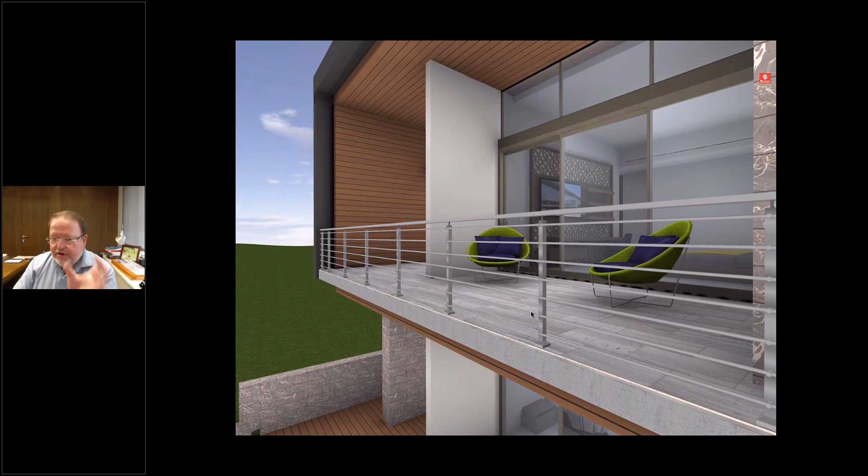So we make that extra effort to put this level of detail in the modeling itself so that the construction guys can learn to trust it, and then they're not asking questions all the time, or assuming things all the time.

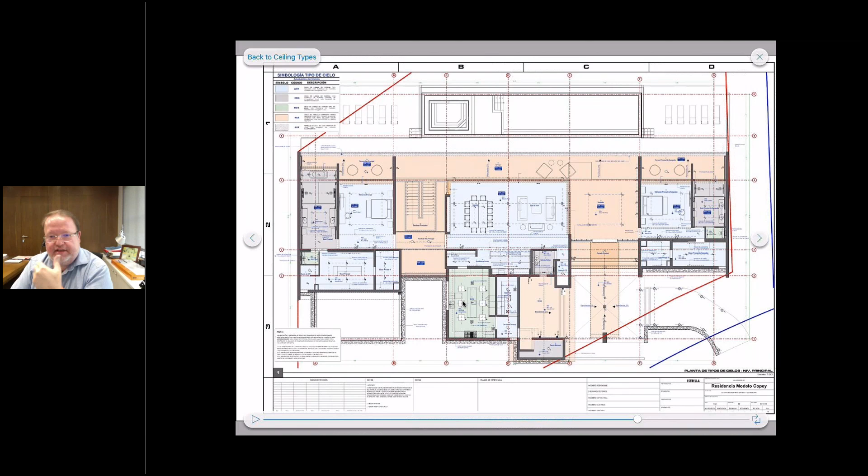So this just makes it far easier for the construction teams to understand what needs to go where, as opposed to, let's say, imagine if this was just simply a black and white, and they have to go in here and read a code and say, oh, this is MDT, and then go to the legend and figure out that MDT is whatever type of sheetrock. So applying color everywhere that we can eases the understanding and makes the speed of understanding the project by the construction teams a lot quicker.

And of course, they can trust that the data that's shown on some of our schedules, which we actually put into the plans itself, is also trustworthy. So in this case, this is just a schedule that's associated to that reflected ceiling plan that I was showing, which then tells them, all right, so we have a total of Durock cement board ceiling of 101 square meters, and the regular sheetrock ceilings are 425 square meters, and so forth.

So same kind of thing on some of our other drawings, and you can see I'm just sort of perusing through some of the different views that we put on our construction drawing set, and you can very easily see the different application of model view options, graphic overrides, and so forth, to just convey different information.

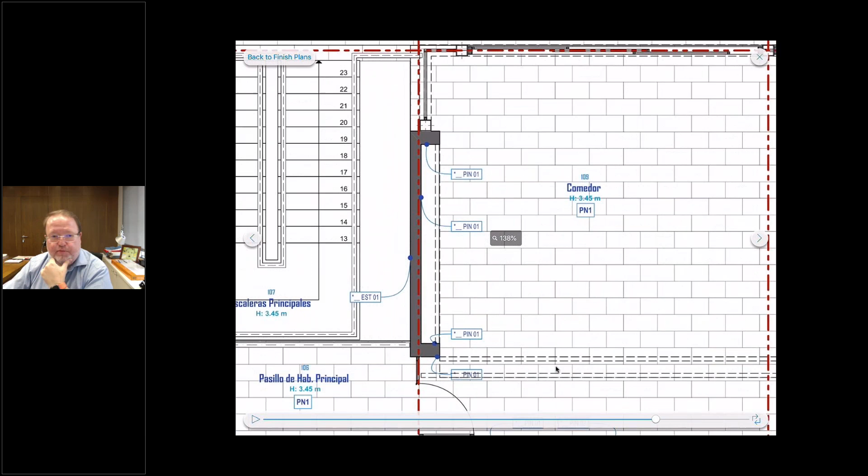You can see how everything's from the same live model, but in this case it's a floor finish plan and wall finishes plan, because we also typically use these tags, which are smart tags. These are actually calling out the surfaces that go on each surface of that particular wall. And that, of course, is associated to a legend that says what PIN01 or PIN02 each actually mean.

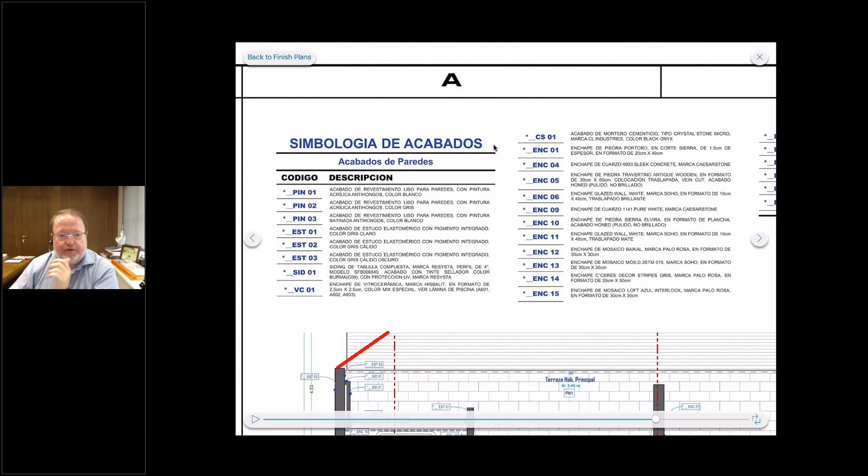But our normal workflow may be that for us, ENC01, during the course of the project, may be called exterior stone cladding, and PIN01 may mean interior white paint. But then at the end of the workflow, we change each one of those surface names into this coding, so that when we use this schedule and tell it to report automatically, then instead of a really long, cumbersome name that is convenient for us during maybe 5 months of the project, at the end it can just be converted very quickly into a code, which is what the guys on site are used to read.

Again, this is just the schedule showing some of the data of that flooring or finishes sheet, which tells them what each of those flooring types are supposed to be, some of the specifications, all in a similar fashion to how John was explaining his approach for costing. All of this is information and data that has been plugged into properties. So we make heavy use of the properties feature for this type of application, pulling data out of the model to include it into our drawings.

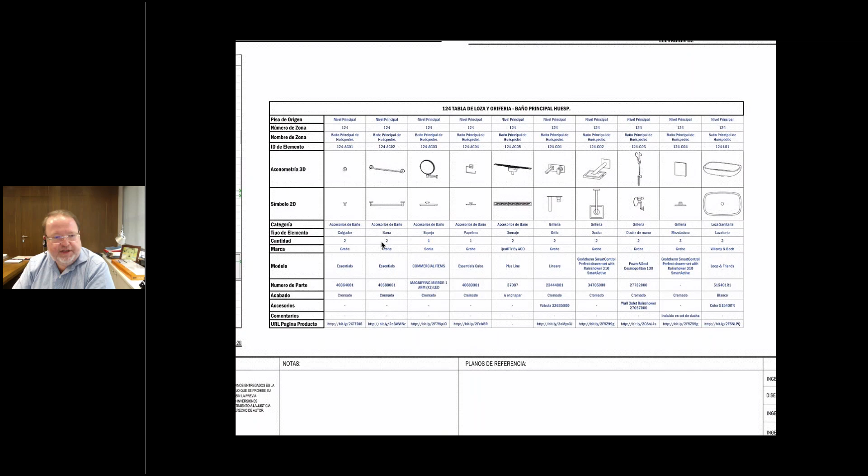In a similar way, in our interior drawings, we also like to provide these schedules, which are a little more visual, of some of the equipment that has to go into each one of those spaces. So we'll prepare one of these schedules, and the filter for this is pretty simple. It'll just say, hey, if this is zone number 124, then list all of the objects that are inside zone 124. And then all of this data down here is punched into the properties: the category, the type of element, the brand, the model, the part number, the finish, and so forth.

So there's lots of clarity, when they're looking at some of these interior drawings, of the actual objects or elements that were purchased for the project and need to go into each one of these spaces. So I think this is a quick rundown of some of the stuff that I presented at BIM World. I don't know if anybody has some specific questions for this part of the presentation before we jump into the Bluebeam part.

Yeah, they're both 3D and 2D. Let me just come out of my presentation mode and very quickly show, let's say, our reflected ceiling plans. And so we do two types of reflected ceiling plans.

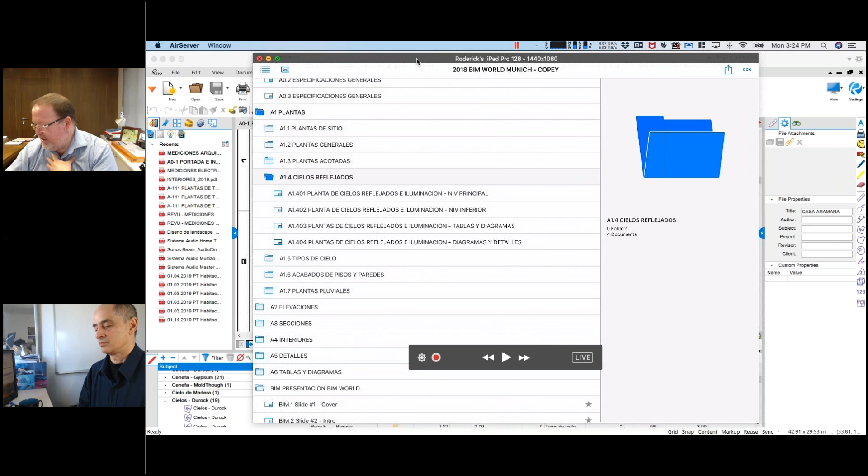We'll do a ceiling type plan, which is this, which I showed briefly. And we also do our lighting design plans, which is not an electrical plan. This is where and how we represent our lighting design in the sense of where each light fixture needs to go and the type of light fixture.

So these are actually 2D objects that I created, and they're very simple objects. They're basically just line work with a text element associated to the object, so that in this text you can just punch in information, and then we create a lighting schedule, which is very, very simply pulling information out. So the light fixtures coded A are a Leds-C4 fixture, it's a Multidir Evo S, and all the information associated to that.

So these are very, very basic 2D objects, which just have the necessary containers to punch information into them, which are basically property data, so that a table like this can be very easily created. Now, you're also representing them in 3D. Are those objects that you're placing in this view appearing in 3D, or are you using separate elements for the 3D representation?

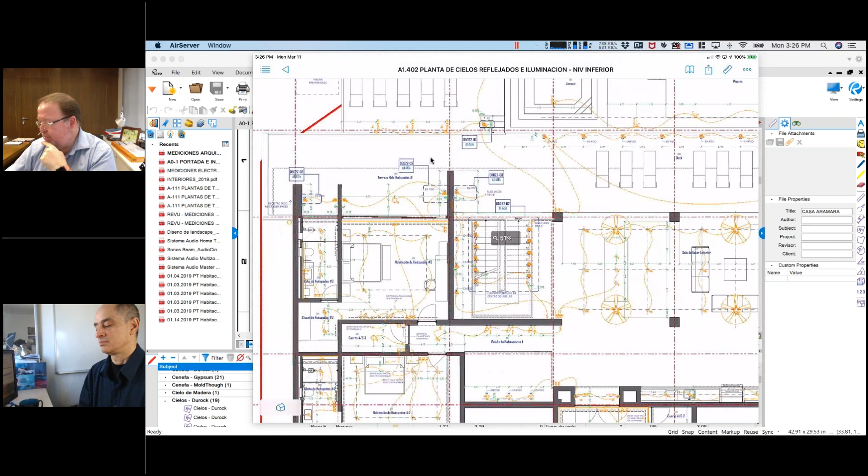In the specific case of the lighting fixtures on our lighting design plans, these are not represented in 3D. However, all of the light switches, for example, right here in the center, see this object. The way that we prepared these sheets is also using a Cadimage tool, in this case the Cadimage Electrical tool. So this object is part of the Cadimage Electrical library, which provides this 2D representation, and at the same time is modeling a gang plate with the 2 dimmers inside them. So that's how we come up with that 3D content that I was showing before.

So that 3D would include the receptacles as well as switches, but what happens with the lighting if you're looking at the interior of the room and you want to see the ceiling lights or suspended lights?

I choose not to show them because, depending on our lighting design, the number of different fixtures that we may choose to include on one project or another can be very broad, and the manufacturers change these light fixtures now very, very quickly. So it would be too much of an effort to actually model these elements in a true to life form, like we choose to do with, for example, the plumbing fixtures.

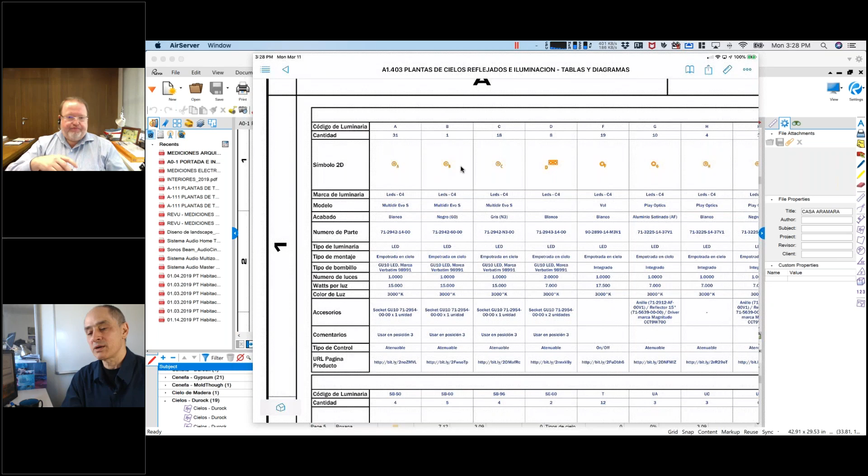So what would happen is that those labels would be very short or very generic in many ways, or I would end up choosing to not specify some things that otherwise I would feel I should specify. In this case, I feel safer from a liability standpoint, making sure that we have all of the necessary specifications and notes and so forth, so that we're covered even from a legal standpoint on the work and the level of specification that we do on our projects.

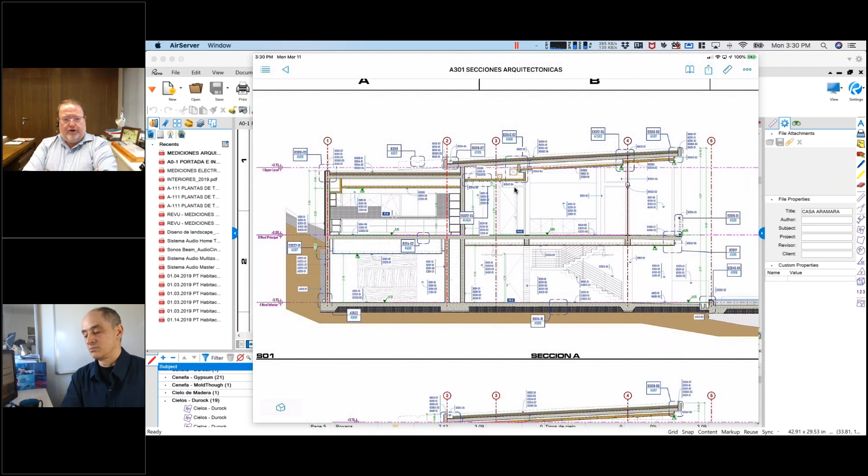And the reason why is that by doing this and having this schedule be automatically generated by the tool, then, hey, I can make sure that I'm correctly specifying with the level of detail that I want the actual explanation of, let's say, a post-tension slab, or the kind of insulation that's supposed to go here.

Now, there is a disadvantage that we have, because we're doing projects in Costa Rica. Our specification is in Spanish, of course. Spanish, as opposed to English, is tremendously cumbersome. There's no real way to specify in a short manner many things in the way that you can do it in English. So in English, you might just put in insul R15, and everybody's going to understand that that's R15 batt insulation. In Spanish, you end up doing a whole sentence to do the same thing. So it's kind of ridiculous that way. So this is a good way for me to work around that language barrier, if you will.

So one other thing I'll point out about that particular reporting is it's very straightforward in the Keynote tool to say this report should only report the drawings that are on this sheet. So you have those two sections on that sheet. Whatever elements are called out in those two sections will be listed, and things that are in other parts of the project will not be seen. So it can be very specific, whether it's short or long, but you're not having stuff that people might be looking at saying, well, where is this reference? No, it's not on this sheet. So that's a powerful part of it.

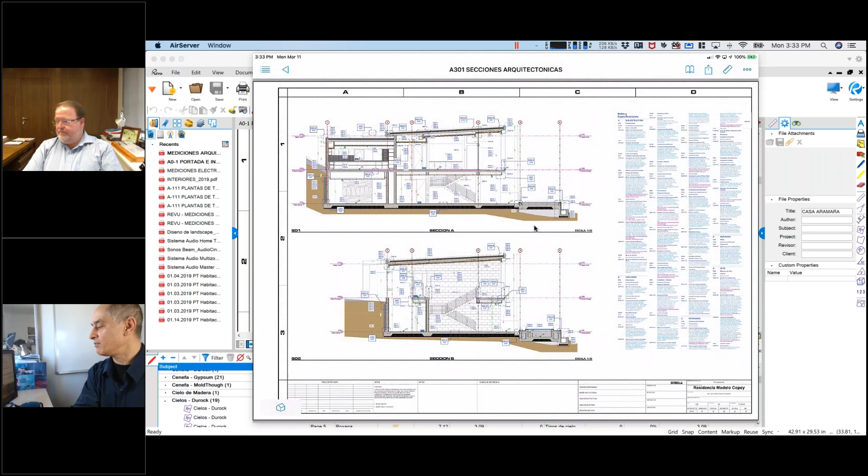Excellent. So I'm sure there's some other questions. I guess do one more before we transition to the quantity communication and calculation in Bluebeam using the ArchiCAD model. Roger Schaefer says, can you show the plan view sheet with the 3D views again? So we are in BIMX, and BIMX is combining the actual layouts, either the entire set or just some subset that you decide are going to be included in the BIMX file, because you might have 100 sheets and you might put in 25 sheets for this type of communication.

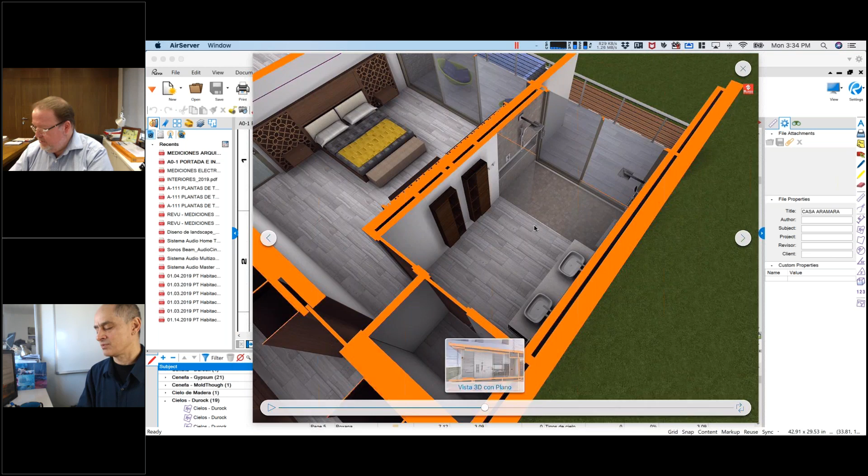I think it probably must have been maybe this one. Well, it actually went back. Let me see. It must have been this, or maybe the section one that I was showing. Roger says it was a bathroom interior. Okay. I think you were talking about these fixtures or the outlets and light switches. So yeah, that is probably that one.

And so Scott asked, he mentioned BIMX Presenter. Is this an extra purchased from Graphisoft? So BIMX Presenter is part of the BIMX Pro tool set. You get BIMX for free with ArchiCAD, and then you can upgrade it. I think it's like $75 or something like that to get a license to do more things with BIMX. Is that right, Roderick? That's basically it. Graphisoft has changed their pricing structure a little through the years. At one point it was $49. Now I think it's a little more, but it's still very reasonable for the kind of power that you get on an application like this.

In my case, for example, I use BIMX for pretty much everything that you can think of. I use it for client presentation during the course of the project. I use it for my site visits once we have a project that is under construction. I even use BIMX for doing plans review. When we're working on a set of plans and we're not completed on a project yet, we may be 70% done, I'll tell the guys, all right, just publish a set of drawings and then send me the BIMX.

And I'll maybe sit at home on my couch with my iPad and just be flipping through the drawings. Or sometimes, in my workflow for using the marker tool to issue corrections for the team, I'll be using BIMx, looking at the drawings, because reviewing a set of plans in BIMx is a lot easier just because of how fast it is. And I'll have ArchiCAD open right next to me on my computer, and I'll be punching in the corrections and sending them out to the team through Teamwork.

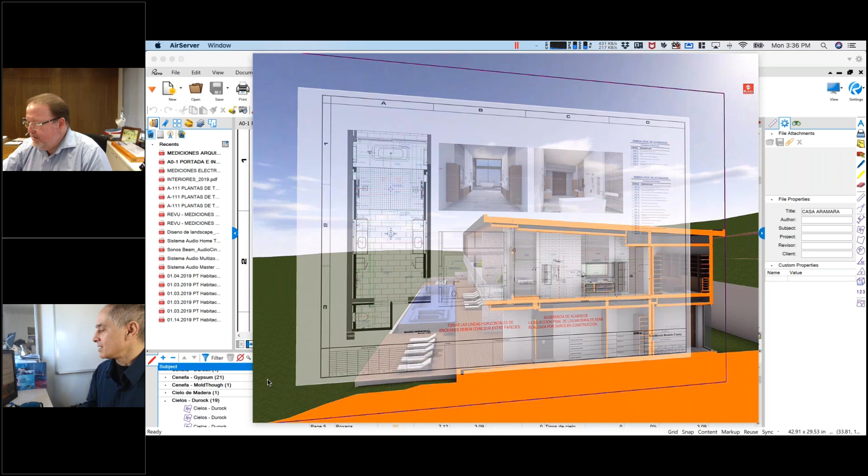Yeah. Now, one thing we wanted to show as well was the process of how to use the presenter tool. I'll just take 5 minutes and show this real quick. I'll use another project that I just loaded up so that I don't have anything set up on that one. Let me see. I got lost within my projects. Should be somewhere down here. Okay, here it is. So this is a simple project that we just recently completed.

Nope, there we go, it disconnected. Okay, are we back up again? Yeah, we are. Okay, perfect.

Okay, so the workflow of this is very, very simple. You use this little bookmark icon up here. I'm going to tap on that, and that opens up a panel that gives you 3 choices. You have your favorites, where you can set up the favorites to use the presenter tool. You can have your gallery items, and gallery items are cameras. You see it says 1 camera.

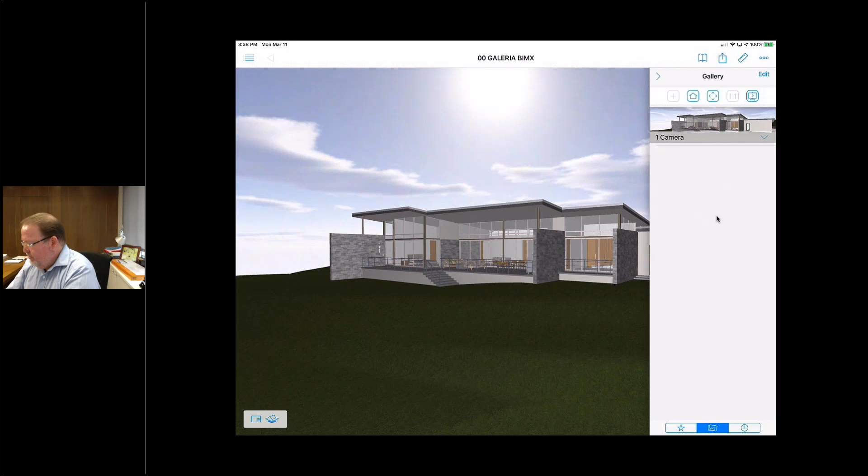Within my ArchiCAD model, if I set up 10 different cameras, they're going to show up here as preset views. And this used to be the way that I would do a presentation to a client. Previously, within my ArchiCAD model, I would set up the different cameras in different locations throughout the project, and then I would be tapping from one camera view to the next. Now with the presenter tool, I don't need to do that. The way to do it is super easy. You can see here there's a little plus sign.

So let's say this particular view that I have here, I'm just going to close this up. I can adjust the angle of it, and say, okay, that looks about fine. So I just tapped on the bookmark icon. Now I'm going to tap on this plus sign and call this rear view. Click save, and I have a first favorite saved. Then I can just turn it in another direction, tap again on the plus sign, and call this angled rear view.

And then I'll say, okay, you know what? Let's go to a floor plan. I want to show the client just the general floor plan as I'm explaining this. So I can just set this up like so, tap again on the bookmark, tap again on the plus sign, and call this floor plan.

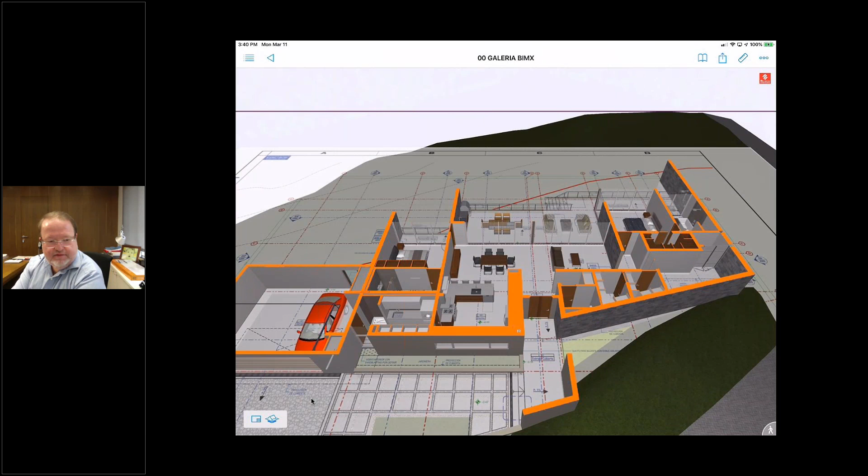And then I can say, hey, I want to show maybe a 3D version of this floor plan. So I just tapped on the 3D icon down here in the bottom left. Maybe I'll just turn it like so. I'm just setting this up really quick. Go back to the bookmark, tap the plus sign again, and say 3D floor plan view. And I'm doing all of this on my iPad, so no work in ArchiCAD at this moment.

And then let's say that I want to go to a section. Any section will do. I can just zoom into this particular drawing and repeat the process. Tap the plus sign again and say this is section A. And then maybe I want to show a 3D version of this, so I'm going to tap this 3D icon here at the bottom.

So BIMx will show me the overlay of it with the model behind it. I'll set it up like so, repeat the process again, and then say 3D section A. Right, so that should be good enough for the purpose of the explanation.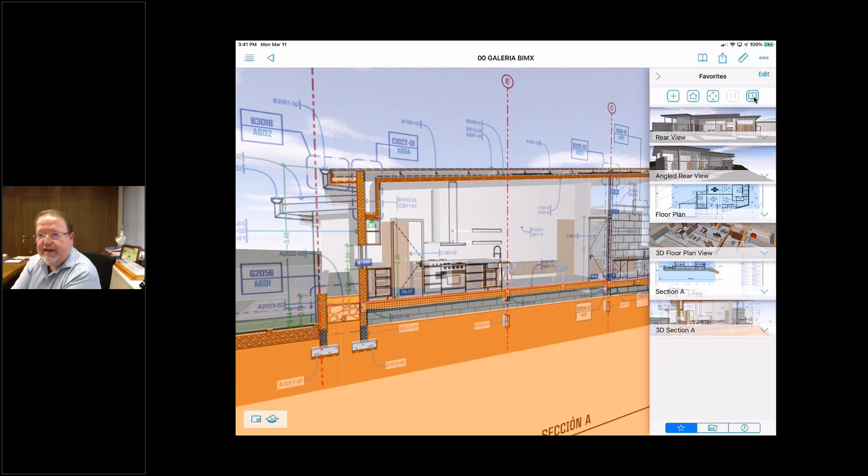And then when you sit down, let's say with the client or whoever you're presenting this to, the only thing you need to do is tap on this icon here, which is the presenter icon. So tap on that, and it'll take you to the very first slide. So now this is basically imagined as a PowerPoint presentation. If you notice on the screen, I have an arrow here on the right, an arrow on the left. So this just flips between the slides.

And I have a play icon here at the bottom. So I can either just say play, and it'll go from one to the next. It waits a few seconds, and then it automatically changes to the next slide, waits a few seconds again, and goes to the next one. Or I could just tap on the screen and manually flip from one to the next. So it's a really cool tool for ease of presentation and very powerful at the same time.

That's great. I'm glad you showed that, Roderick, because it is so straightforward to do once you realize, first of all, that it's possible, and secondly, just a couple of things like hit this plus sign, etc. The other thing I'll point out is Roderick was showing me this a couple of days ago, and I was saying, well, where are you tapping? And he said, oh, on the plus sign. I said, well, we couldn't see that he was moving anything like a cursor over to the plus sign. There was nothing that highlighted it.

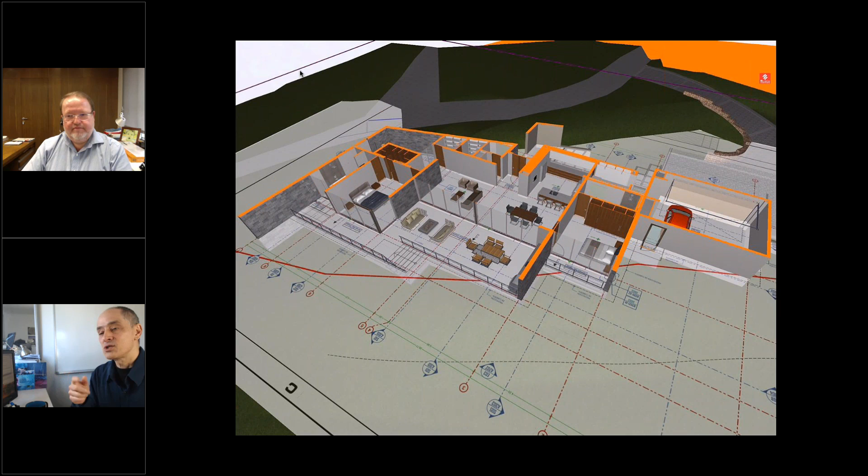And so what we worked out is on his computer screen where this is being relayed, for purposes of training, he's moving his mouse to where the area on the iPad screen is, and then separately putting his finger on the iPad screen to tap it. So normally you would just be tapping and you wouldn't see where his finger is, and it doesn't blink to show that you tapped a button, it just does the action.

So, all right, let's take a look at your estimating workflow with Bluebeam, because it's definitely a different approach that really works effectively for you. Okay. So yeah, I'm still showing my screen. I'm just gonna tap back here. So this is one of our other projects, and this is an example of finished work of the approach of how we use Bluebeam for mainly our quantity takeoffs, and of course, estimating, which is associated to quantity takeoffs.

And the reason why I prefer to use this particular approach is very simple. Because we're doing design build, we're handling contract management for our clients as part of the work that we provide for them. As part of handling contract management, we're constantly dealing with lots of different subs for different trades. So in this particular example, let's say this is a reflected ceiling plan showing the different types of ceilings that are supposed to go on that particular section of the project.

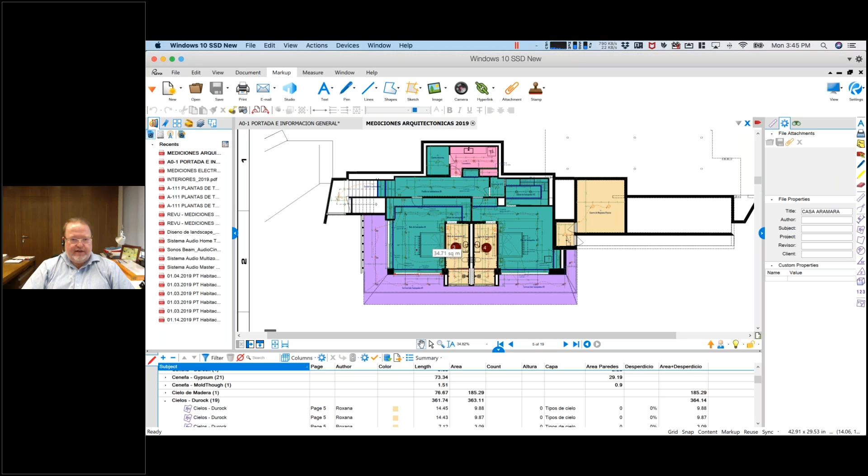So I'll really quickly show you how. First I'll show you the way that we apply it, and then I'll show you a quick example of how things are done. Just maybe a 5-minute explanation. So if I just click on this markup, we call these different ones markups. You see the little yellow points on the vertexes. So this is one markup, and this has lots of data associated to it.

What I have here behind is just a PDF file. So we do a publisher set from ArchiCAD. We export our entire set of drawings out to PDF, and then within the PDF, the only thing you need is one dimension somewhere or one reference point, let's say from this corner to this corner, that measures exactly how much.

You calibrate the drawing so that you're telling the program what exact dimension is from point A to point B, and then everything else gets calibrated immediately. In the specific case that you have, let's say, different drawings at different scales, then you can do viewports in a similar way to how viewports were handled back in AutoCAD, years ago when I used to work in AutoCAD. You can assign viewports and say, hey, viewport 1 is at 150 scale, viewport 2 is at 120, and so forth. So every markup that you do is true to life size.

So if you see, it has data associated to it. If I click on it, it highlights it down here at the bottom, and it's telling me that this is a Durock ceiling. At the same time, it tells me that Roxana was the one that created this markup, and that it has a total length of 41.05. So this is the perimeter length of this particular one. Since this is an area markup, the length may not be that relevant, but the area becomes relevant. So this is 37.98 square meters. And I assign a 1% wastage for this particular trade.

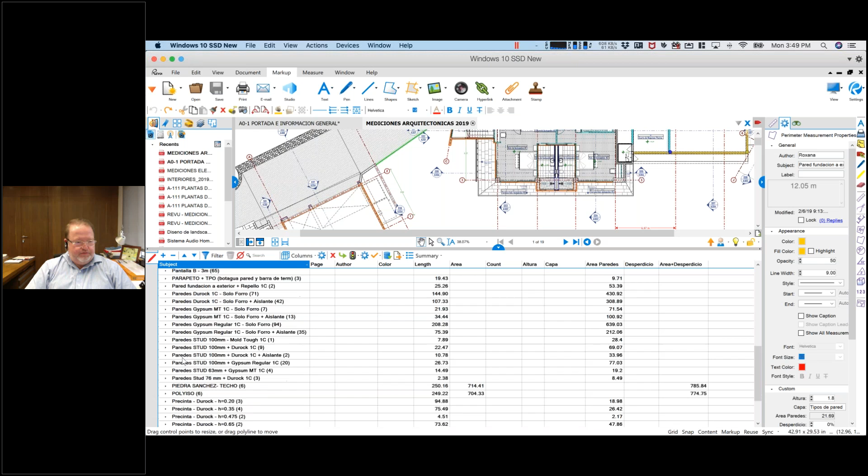So I'll just show you a very quick example of that. Let's say the data is basically grouped. If I click on this minus sign, oops, sorry, let me do this differently. Okay, if I click on the minus sign, I'll just make this panel bigger. You can see that I have lots of different data names here. This particular one has 2 markups, or if I go to a ceiling type, the Durock ceilings, in this case I have a bunch of them. I can click on it and, just using my down cursor on my keyboard, flip from one to the next to the next. So I can do a very quick review and say, yeah, all of this is correct.

So this is just a very simple way for me to assign work to somebody else here at the office, tell them to do all the markups, and then I'll do a review and make sure that everything is correct. But at the same time, the reporting that I mentioned for the contracts is very powerful. So let's say I'm just gonna order this.

Roderick? Yeah. Sorry to interrupt. Can you just turn off your webcam? Then it will actually make it easier for people to see this when it enlarges. You just turned off your screen sharing. Yeah. Wrong button. There we go. Perfect. Okay.

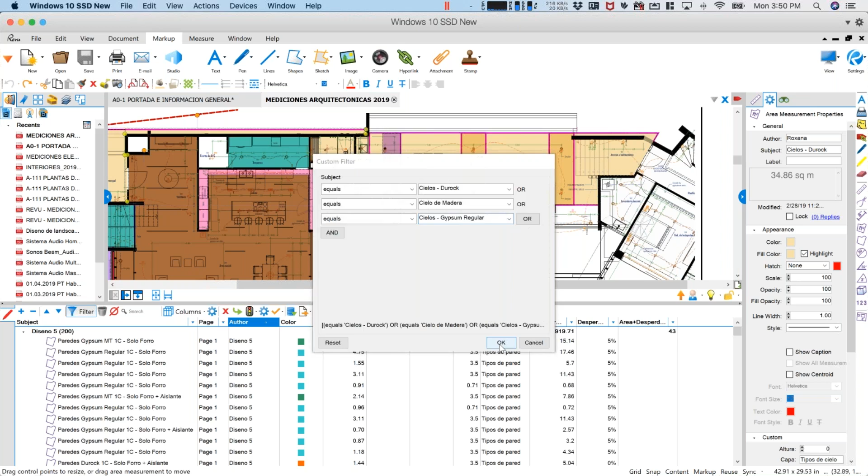So if I very quickly tell it to order the data differently, and the only thing I did is click on the title here on the top, I can filter information. So give me a custom filter by subject name. I want the subject to equal Cielos Durock, or equals Cielos de Madera, so in this case the wood ceilings, or equals, I'll do a third one, regular sheetrock ceilings. Okay, so I'll just filter data out by doing it that way.

And if you see, nothing was really turned off. Some of the other stuff was simply turned to gray. So it's not only doing a graphical filter, but it's doing a data filter. So now on my data set here, you can see I don't have the loads of information that I used to have before, which was a really long list. Now I only have 3 items on my list. So once I filter data this way, I can use a feature which is so cool, which is this summary.

So I'll just create very quickly here a PDF summary, and I'll tell it to browse through all of the pages in this document, which are 19 pages. I will have it exclude all the filtered markups and exclude the hidden columns. So maybe my file has lots more columns, but those are also hidden so that they're also not taken into account on the report that I'm about to create.

I'll tell it to include totals and include the page content. This is the big key, and you'll see in a minute what it does. And I'll just give this a title. I'll just say ceiling summary example. I want to do the flow style because I just like it better. I want my preview to be large. Page size, it can be a letter size page, and I like it to be reported in landscape fashion.

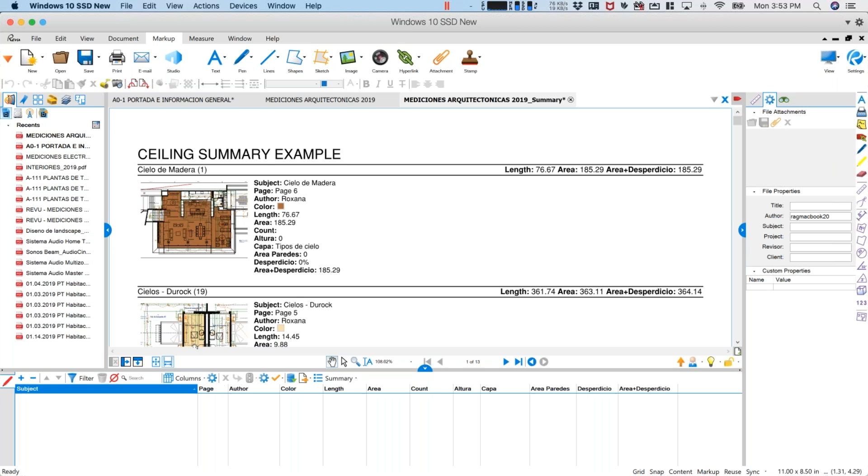So basically, okay, here's the summary. So we give this to our subs. Through the years I've learned that I am more efficient with my time and my staff's time if instead of just sending a set of drawings to a sub and saying, give me your quote for doing all the sheetrock work on this house, I'll send them the drawings as a reference, but I'll send them the PDF summary, which tells them the specific trade or the specific task that they need to do on the different areas, and it shows them the actual area on the floor plan.

I'll complement this with the actual full set of plans, or the actual plan, showing where all this information came from, so that they know that each one of these things that they see on the list actually came from the drawing. So for us, it's much more efficient this way, instead of just saying, hey, here's the drawings, you quote the job. And then two things can happen. One could be at the quoting time, I'll have three different quotes from three different guys, and each of them has different dimensions and different quantities.

Then I'll have to be measuring things myself, figuring out who is right and who is wrong, and going back to the other one saying, hey, your areas are wrong. So if I have to do the measuring myself anyway, just to confirm who's right and who's wrong, I'd rather do it outright up front myself. Of course, this is part of the work that we bill our clients to do. And then we have only one source of data for the quotes. So then the quotes can be different because the prices are different, but that's the whole idea of getting three sets of quotes.

Because locally we have a disadvantage, and I'm not sure if in the States it's a little different. Hopefully it might be. Maybe somebody may tell me that it's not. A sub may, if I give him a set of drawings and I tell him, go ahead and quote this job, and let's say he was the least expensive option and I hire him, then we're halfway through the job and he starts coming up with extras and he says, oh, that wasn't in the quote. I say, well, it was in the drawings.

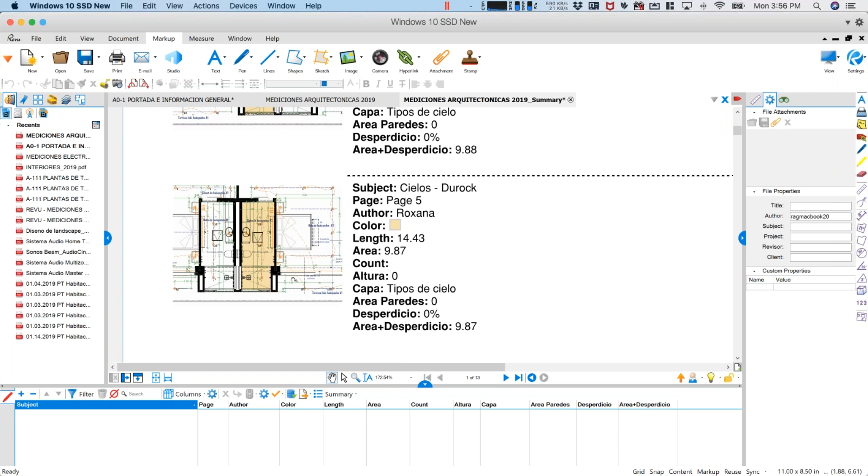And if you notice, it's only showing this particular markup, not showing the one right next to it, which is listed right here on the next markup. And this is telling me that this is 9.88 square meters, but it's tallying up everything, and it's telling me that in total it's 363 square meters.

So this summary, which is a multi-page document like you see here, we attach to the actual contracts that we sign with the subs. So this way they are contractually tied up that this is the scope of work that they were told to do. And this allows me to very easily get away from, or even eliminate, the potential fight or discussion of the extras, and what really is an extra and what is not an extra on the job itself. So this is one approach, or this is my approach, I would say.

So the workflow of how to get to this, I'll just show it real quick here. The stapler is actually a tool that's part of the Bluebeam program. And right here on my right, I have a list of PDF files for a particular project. So I'll just select here. Oops, I forget I'm in Windows. So I'll just select here some of these sheets. Let's say I'll include a couple of elevations just for the sake of example. And let's say that these are the sheets that I want to include in a set of one PDF file that I'm going to use for the quantity takeoffs.

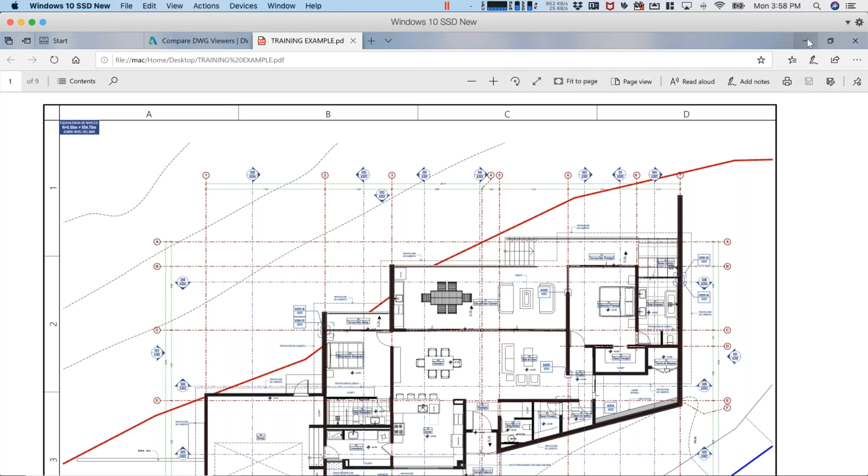Let me just get rid of that. So here's the training example. So let me open this up inside Bluebeam. And here's the file. So these are the sheets that I selected. So it created very quickly one PDF file containing all of those drawing sheets.

Now, in order to do a markup, the very basic thing that I need to do is just calibrate the drawing. So if you can see here, I have one dimension that tells me that from grid 1 to grid 2, it's 7 meters 48. So I'll just go here, tell it to store the scale in the page, and calibrate the drawing, and if you notice, it will identify vertexes. Because a PDF file is actually a, I forgot the term, it's a vector format. So it's actually identifying lines and intersections. So I'll just tell it that between these two intersections, I have 7.48 meters.

And once I do that, let me get rid of this, then I can just do a test dimension right here inside Bluebeam and make sure that that dimension is right. So I just confirm that. And if I need to make sure, I just add 2 decimals, so it's 7.48. So from this point forward, any measurement that I do inside Bluebeam will be precise.

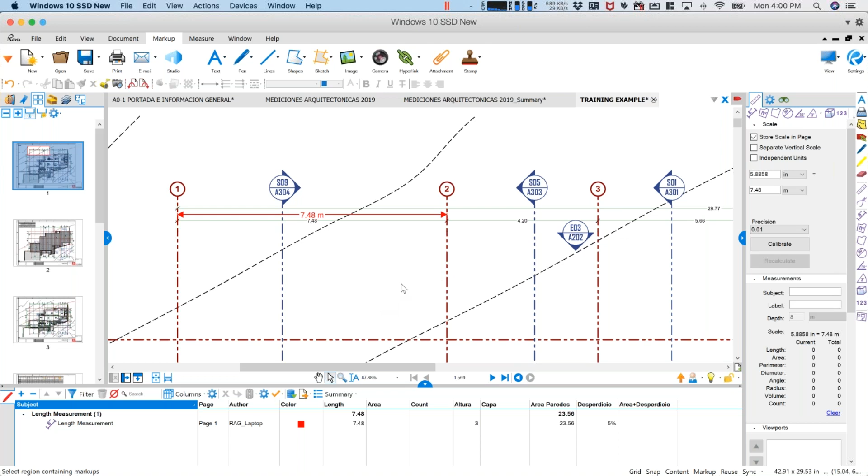So let's say that I want to measure out some of these floor areas as a quick example. So I can very quickly just create an area takeoff, and I can just start marking out my intersections here real quick. And let's say from here to here to here. Double click on that, and I just finished one markup. Then I'll select it, and I'll configure that particular markup. So instead of my area measurement, I call that polished concrete, because that's the finish of that particular floor of the house.

And I'm going to give it a yellow color, and I'll give it a lower opacity so that I can see through the markup, and I can actually see the drawing behind it. I can change the color so that the border isn't red, which is kind of weird. Sometimes if I have lots of markups, these areas are a little bit bothersome, so I'll turn that off.

And I can punch in some additional data in here as well. So I can give this a layer, I call this flooring, and I can give it a percentage of waste. So let's say I'll give it 5%. Oops.

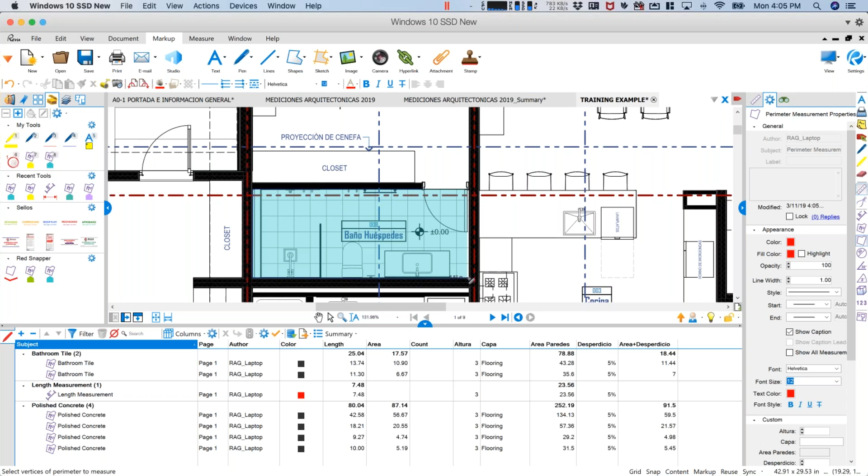Now, you might be thinking, okay, this is great for anything that's horizontal, your flooring, your ceiling, and so forth. Anything that's vertical is just as easy. Instead of an area markup, just do a perimeter markup. So let's say that we have bathroom tile also on the walls. I'll click on these vertexes. Now click on this, which it now called perimeter measurement. Then I'll call this also bathroom tile. So it'll be grouped within the same set of information, but we will know that we are looking for different data from it. We're not looking at the horizontal area, we're looking at a vertical area.

So that's where these custom columns come in, where I created some formulas. If I give it a height, let's say this is 3 meters high, you'll notice that this data changes. Now these other ones, the flooring ones, should be 0 height so that it's not providing false information. And the actual vertical one is reporting information. So if I need the total amount of tile to buy for this bathroom, assuming it's all tiled with the same thing, I just add this 18.44, which includes the wastage, plus the wall area, and that's it.

And I still have a graphical representation of that. Normally, I will do these lines a little thicker and lower the opacity of the line so I can still see the drawing through it. The reason I like thicker lines is so when you're zoomed out, you can make out much of the vertical takeoff data that you're doing on a horizontal plan. And this is far quicker than trying to go to a section or an elevation and measure stuff from there. So this is pretty much a quick rundown of my approach and my workflow.